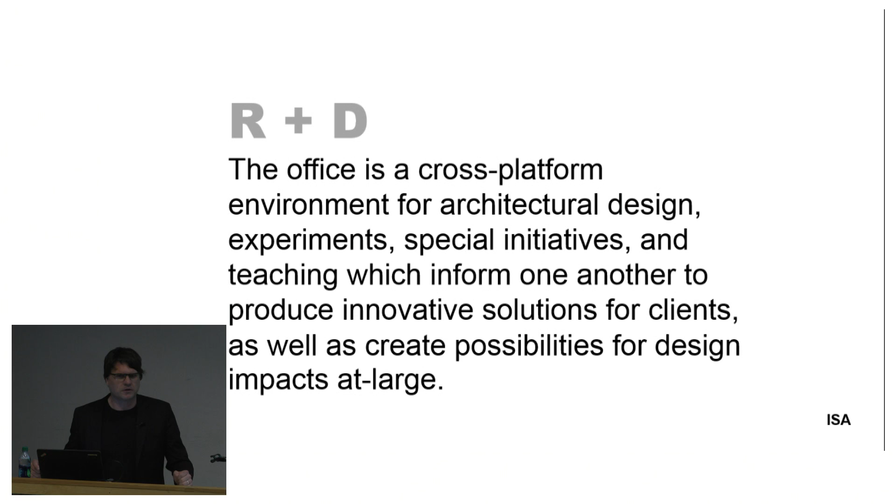We're also really interested in systems and infrastructures and prototypes. We're slightly less interested in very precious singular acts of architecture and more interested in typologies and designs that we think of as being repeated. We always like to talk about things that if you moved it to a different site - which to some architects is horrifying, you could never move that to a different site, it's for this site - we like the idea of thinking about how that idea would adjust itself to that site.

We also love sharing our logic with our clients and the people around us, and we're not really into the alchemy side of the mysterious design process, but like to share the process and allow stakeholders to become a part of it. And we actually find that it kind of radicalizes projects once people buy into the reasoning.

And then finally, this idea of urbanism, which I think is at the core of what we're doing. One of the reasons why I like Detroit in particular is that you come to Detroit and you have to recalibrate your definition of urban. There are a lot of areas of the city that may not look like a city, but are urban because they have history and infrastructure and the kinds of relationships. For us, this idea of brokering complex and contested relationships in different ways relative to different contexts is our way of thinking about - if you're doing that, you're probably operating in an urban situation.

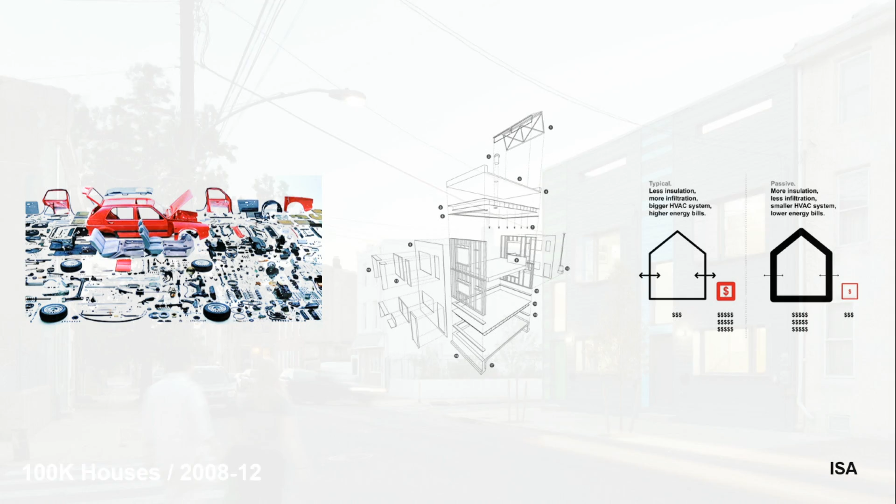So these lots were zoned for 3-story, 2,000 square foot houses. And he came out of the gate saying $100 a square foot, LEED Platinum, 1,000 square feet. We said that's a terrible idea, we're not going to be able to do anything for that. But it taught us so much about this idea of minimalism and simplicity.

And a kind of pragmatism about how to make a building. So we found ourselves thinking less about how do we make a cool building that we make cheaper, and more about how do we fundamentally rethink the way we conceive of a project. And so we really obsessed about every little move. The initial projects were 4 corners, very flat.

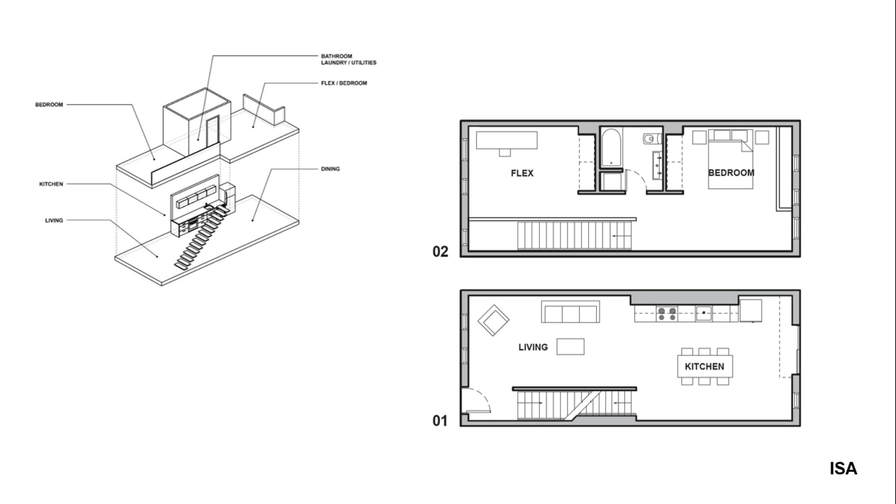So we called these urban cabins. This original house had 2 doors, the front door and the bathroom door. We were talking a little bit today about the challenges of mortgages and appraisals, and one of the funny things about these houses is we've done some subsequently where we actually had to put walls in for closing to show closed bedrooms, and then they would get ripped out—which is a whole other conversation, but I think it's an interesting subtext to innovation and the different layers of other things that affect buildings.

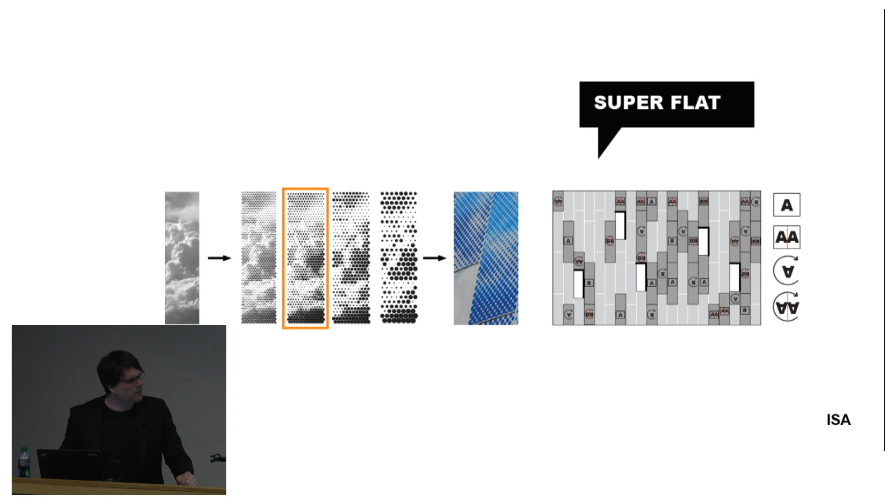We haven't quite moved on this, but this was an experiment we really want to get back to because we like this idea of housing as consumer products that are fun and are more like shopping for other things than houses, which tend to be a constraining transaction. I think this was a $5,000 add to the project. We used one screen, flipped them around—extremely simple in deployment.

The original houses were built out of SIPS panels, which are highly insulated. You can see the insulation sandwich there between OSB.

One of the interesting dynamics worth sharing is that a lot of our work is not built by custom contractors. One of the ways you build a house for $100 a square foot isn't your cleverness, it's that the contractor is willing to entertain the idea that his profit is at a different level. When SIPs panels came out, these guys were very confused by what they were doing, and that's a real hurdle.

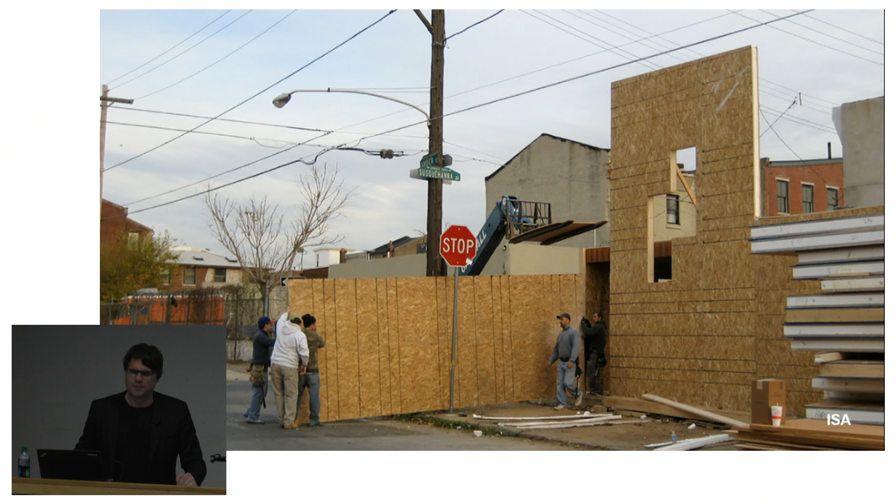One of the funny things about this project is that these 2-story SIPs rely very heavily on the plumbness of the top of the foundation. At this level of contractor, there's always a little bit of unevenness, so when the panels got stacked, they revealed some 2-inch separations at the top—and these are passive house level insulation panels. That was an interesting struggle to resolve, which got resolved in the field.

It's just this issue of cost, contractor, and technology aligning that's always a challenge. We actually wound up doing, and continue to do, double stud walls because they're really easy to deal with. You can bid them to any contractor in town—everybody knows how to build it—and the pricing has actually been quite good.

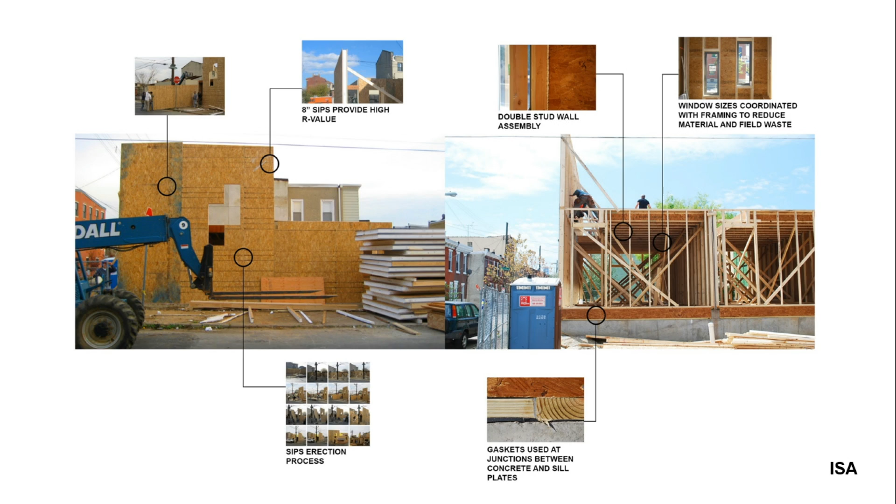There was also a philosophy with this builder. Prefab is a whole other conversation, but this developer was very interested in building local economies and jobs, so he loved the idea of having guys from Philadelphia out here building the houses rather than having them built off-site. This really came together in a nice way.

All of these buyers elected to roll $15,000 into their mortgages to put solar panels on the roof, and I think this goes back to the idea of what kinds of houses young people are buying, what their values are, and what they're willing to spend money on that maybe their parents weren't. So this was an interesting experiment.

I did mention prefab, and this is another kind of formative project for us—a recession project conceived on the back end of the bubble, and it was a prefab project.

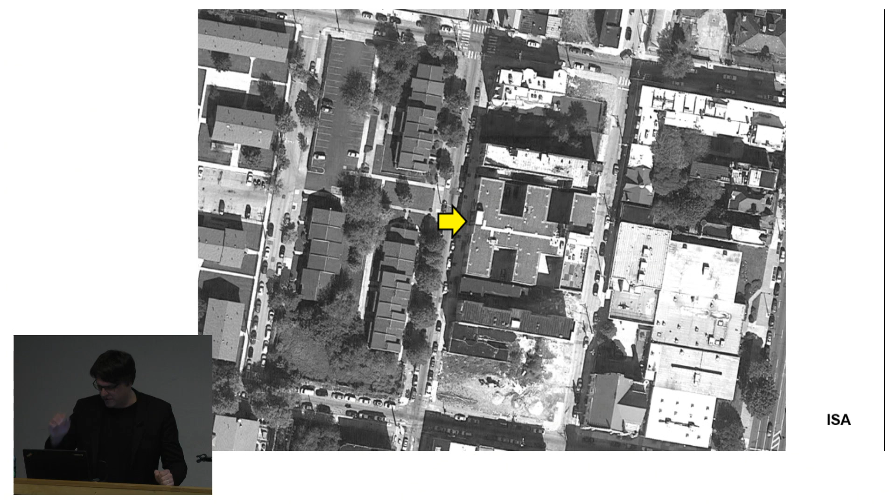You can see this is another infill site, a lot larger—I think this footprint was upwards of 20,000 square feet. This was a 4-story, 72-unit student apartment building near Temple, conceived from the start as prefab modular. This developer was really interested in experimenting with that.

I want to say something about Philadelphia green roofs. Philadelphia has a really aggressive stormwater law that requires the first inch of rain to be managed on site. So what's happened is we get what we like to call ugly green roofs, which we kind of love—they're not there to be an amenity so much as to be a sponge. This was actually the largest sedum green roof in Philly when the project was finished.

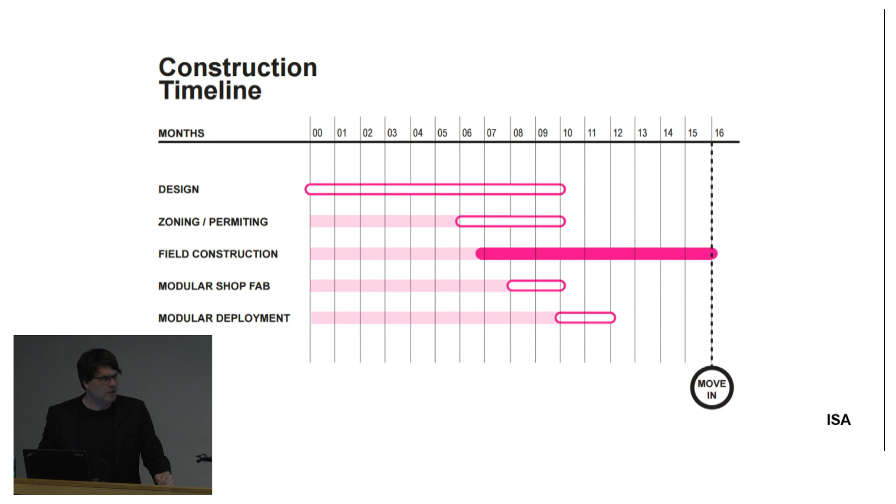One of the interesting things was that it happened very, very fast—the whole building was built in 9 months. What was really interesting, and you'll kind of see this, is that the site work was being done on top while the boxes were being built in a factory in the middle row.

And then they all came together on the bottom there. Those 72 units, everything was a modular box - the stairs, the lounges, I think it was 90 boxes, and they would set about 8 or 10 a day. So if you do the math, the building appeared out of nothing in about 2 weeks, which is kind of an extraordinary thing. But then what's interesting is all the seams - the boxes come out with finishes, kitchens and bathrooms in them, and then everywhere the boxes come together you have to go in and finish. So it's a very different idea about building.

There's a lot of room for innovation there because we're used to building buildings in layers where all the plumbing, all the drywall, all the tile goes in. This was more these sort of chunks that are complete with these seams that kind of need to be infilled.

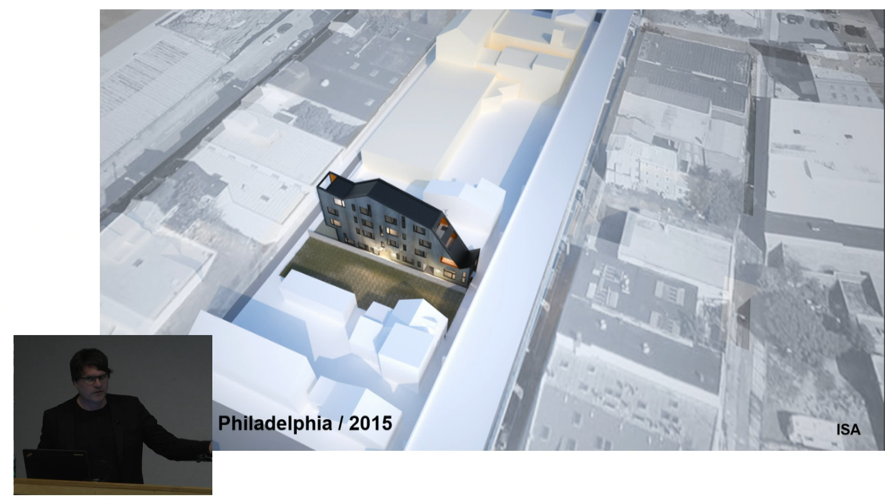So this is a more recent project which I thought would be fun to share. This is a very quirky, weird site - it's 15 feet wide and 100 feet long, and that's an elevated train line. We find ourselves loving these kinds of sites. Our idea for this was - this is in a zoning class that had some funny requirements. It allowed you to go up to 55 feet, had this funny requirement for a cornice line at 25 feet.

So we became very interested in these bands of buildings that kind of accumulated over time. You can kind of see us drawing these little profile lines at the bottom. We saw the profile of the building as an expression of the kind of constraints of the site, and we used that line to develop the membrane.

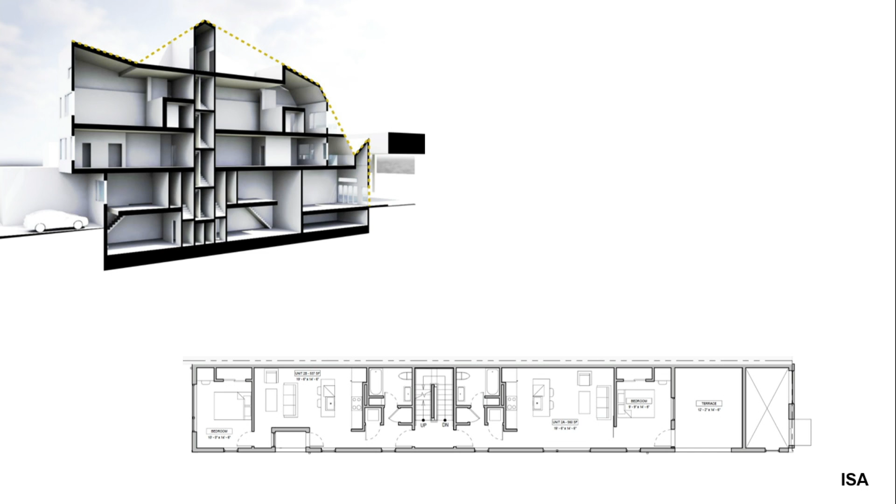What was interesting is those sloped pieces were able to create some terraces. One of the things we had to convince our client of - who of course bought a cheap piece of land next to a train line - his whole thing was, how do we make it feel like you're not living next to a train? And we were like, well, maybe you should just go with it. So we have these terraces that are actually right on the train, and while you hear the train go by, it's kind of an exhilarating experience.

I think we take great pride in turning - it goes back to getting developers to collaborate on building the city well, and I think it's a very exciting pursuit for us. So I think this project kind of comes out of the 100K house DNA. We're starting to look at whole blocks now.

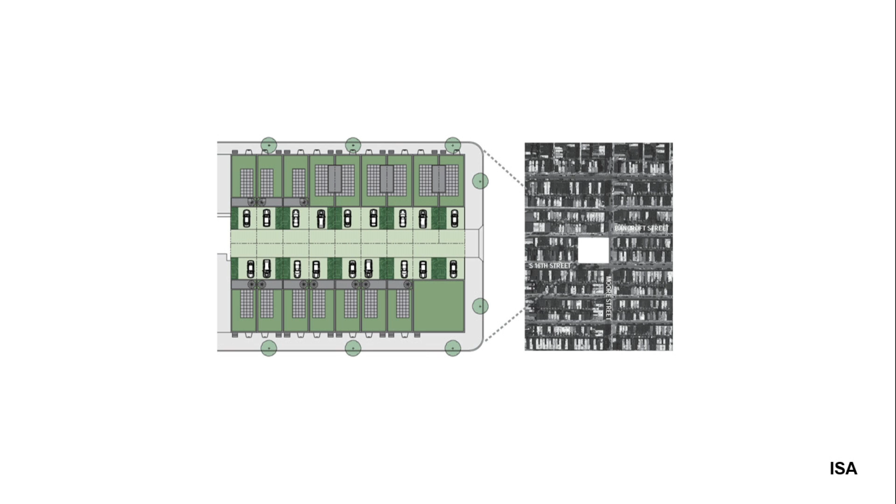Kind of get a sense there of the massing and scale. And there you can see the different building types happening, the row house models on the top and bottom of those plans, and then the condo flats there in the middle.

Roof yards and access are a big deal in Philly, particularly if you're providing off-street parking, since the sites are small. So these roof experiences become significant.

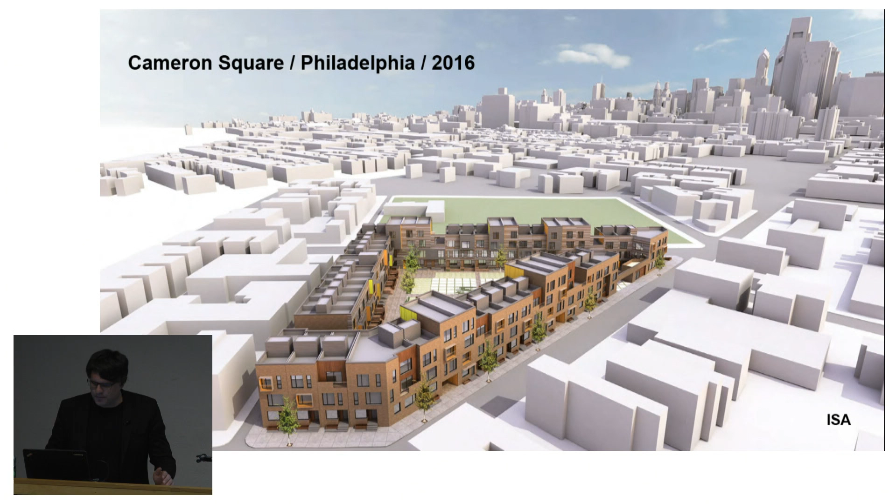Dedicated to this being prefab modular, which is kind of interesting. And I think the thing worth talking about here is this interesting courtyard condition that we're sort of presented with.

The client, frankly, came to us with the idea that they thought this should be a courtyard. And of course we went back to them and said, well, let us study it. We spent some time, and we came back and said yes, we think it should be a courtyard too, after we couldn't get some other things to make sense.

But what was interesting about this courtyard is, if you look at the different street sections there, the different sides of the courtyard have very different streets and different kinds of building typologies across the street.

So we had this idea that the courtyard was kind of responsive, and even though it's sort of large—I think this is 70 units where it stands now—we kind of like the idea of the courtyard presenting a different personality to these different frontages.

I think the big victory here for us was this: the starting point, of course, was the left, which is the courtyard needs to be cordoned off, and it's going to be parking, and it's going to be private, and there's a park across the street. I think in our mind this project is big enough that—Philadelphia being a city of very delicate urban components with lots of pedestrian amenities and very walkable—

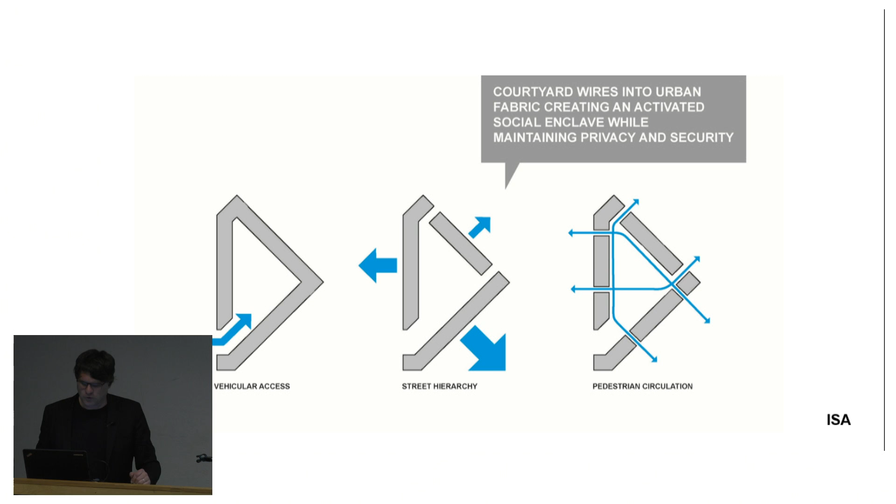We were able to convince them that not only should this become three different buildings with gaps, but we should actually start to perforate the first floor so that people can use this as a sort of cut-through.

So what we began to think about was the idea that we would arrange these boxes as sort of a modular system, and all the buildings are obeying the 16-foot wide grid, so we can push and pull pieces and go from single family to multifamily pretty easily.

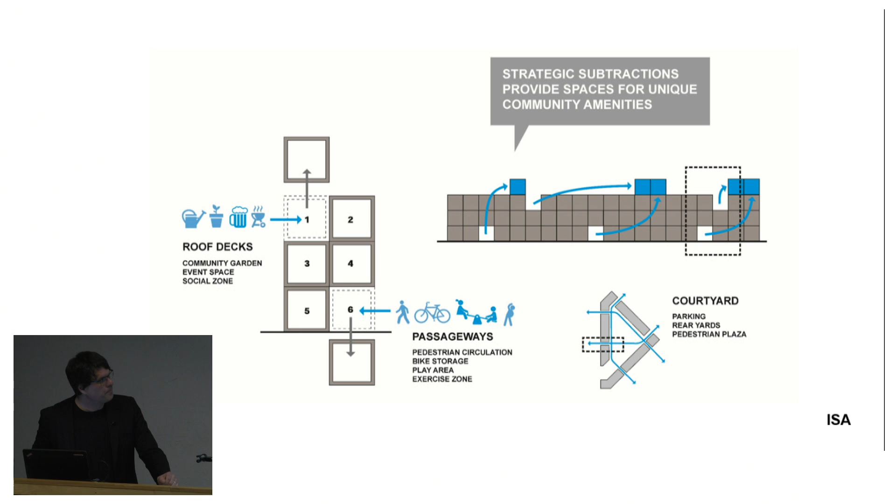The idea would be that you can get some higher pieces on, so we're going to omit some boxes, but ultimately we're going to get the same number of total boxes because we're going to put them on top. We didn't quite do that, but we're somewhere in between.

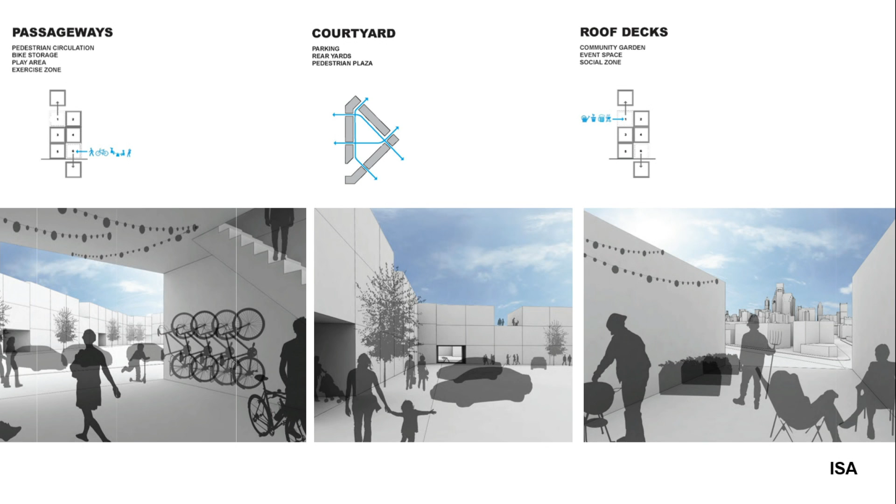And then you're seeing this idea of the roof deck, created when we put boxes on top and create these gaps. So the idea is there's a lot of private space in the project, but also a lot of shared space, and just this sort of idea of block making.

So this is the sort of courtyard that we're conceiving of. And one of the really interesting things about it too is this whole process of, there's certain amenities in Philadelphia that, yards, small yards are something that people hold dear.

One of the things we had an interesting conversation about with our client is the fact that the site's not going to support yards the way some sites will. So rather than forcing that on a site that doesn't need it, let's conceive of a more social backyard space where it's really more of a terrace. And when people are barbecuing, they can decide to eat together. They're going to see their kids. It's almost like a promenade where you're going to see your neighbors in kind of a classic way.

And they really sort of embraced that, this idea that you kind of make the most of the site presented, and we're excited about that potential.

So here you can kind of see this sort of geometry of the modular, which is 16-foot divisions, which become both single families and multifamilies. And then at these what we call knuckles, you see one at the bottom, you see a couple near the bottom, you see one at the top. Those are actually larger single family homes, some of which could be $700,000, $800,000, $900,000.

But what's interesting is in this project of 66 units, you're going to have 3 large expensive houses, 40 or 30 more modest houses, and then a bunch of 600 square foot flats, which might be $199,000, which in Philadelphia is kind of untouchable. So the idea here is actually to make a community showing the total bandwidth of the current market. And we're excited about that, it's kind of an unusual thing to find in a single project.

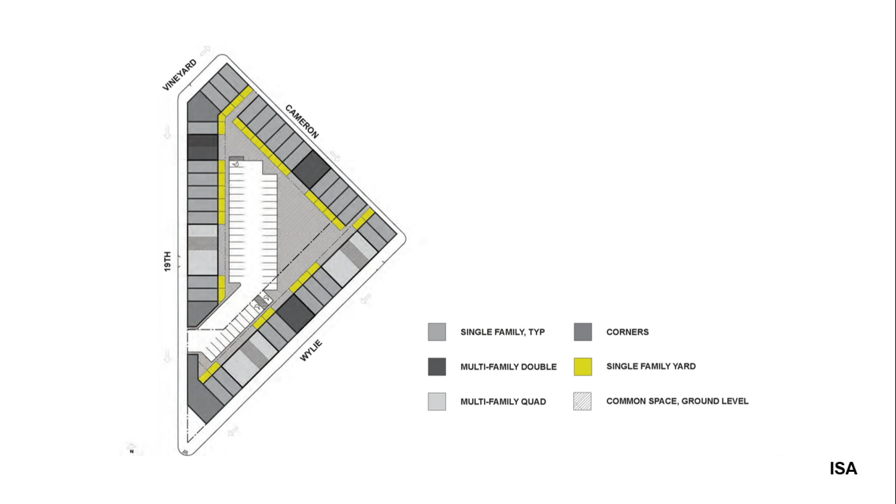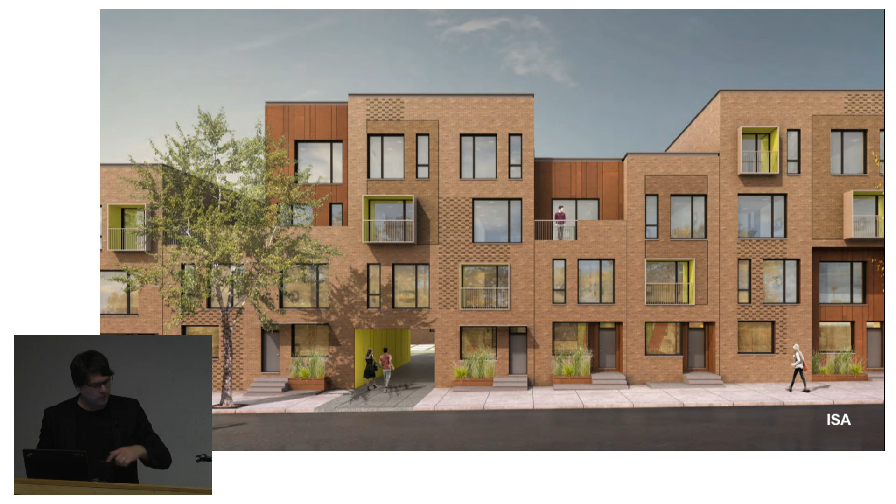This is a corner, so the park is across the street, and I don't know if you can quite appreciate the narrowness of the street to the right, but that cartway might be 9 feet wide. So they're really, and you can kind of see how that frontage doesn't have as many projections, and the first floor is set back. So we had a lot of debate about how continuous the courtyard should be and how much diversity, and this is kind of where we've landed with this sort of wall building that wraps the whole block.

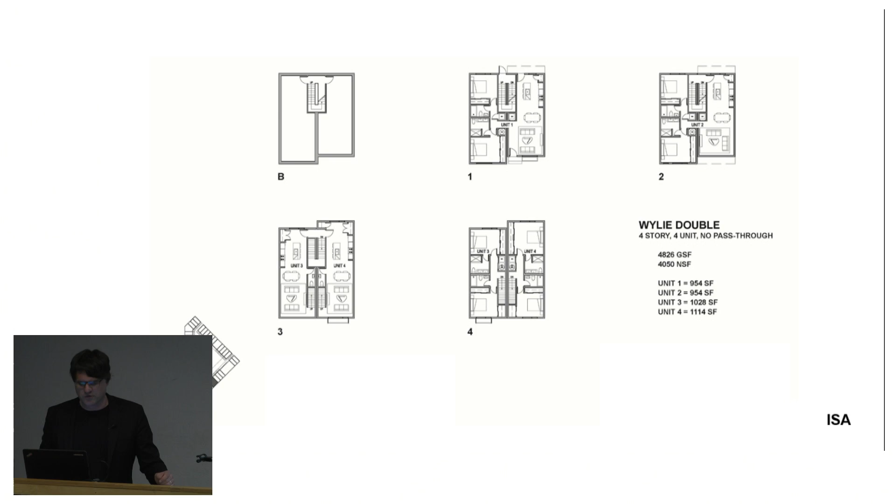The multifamily buildings use the same, so we kind of fit these buildings into the same sort of dimensional component, the 16 feet, where we're getting apartment flats that kind of fit into the space of those single family homes. And what's interesting is the client, as they refine their pro forma, can kind of mix and match the number of apartments versus the number of single families.

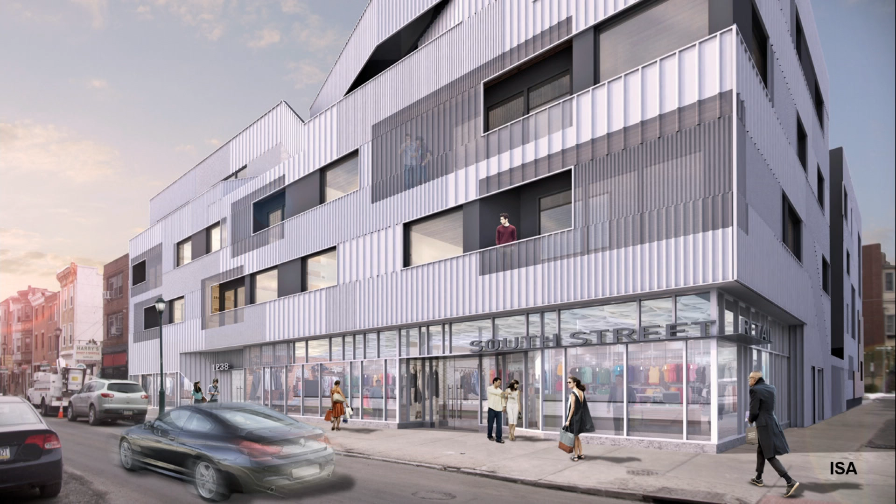This is the building as kind of conceived. I'm hoping the proportion of that is right—just realizing it might not be, looks a little compressed from here. But this kind of language of metal cladding and the transparency of the balconies is interesting. It's got a bit of a Bourbon Street feel, where it's cool to come out, but you want to be a little protected because you're not quite sure what might be going on there.

This is a little like the last project I showed—we've been really intrigued by projects that get big enough where you're addressing different neighborhoods on different sides of a block. In Philadelphia, on South Street you've got the terraces and the nightlife promenade, and literally on the backside of the block you have a 15-foot wide neighborhood street. So it's about thinking how blocks can get completed in that way.

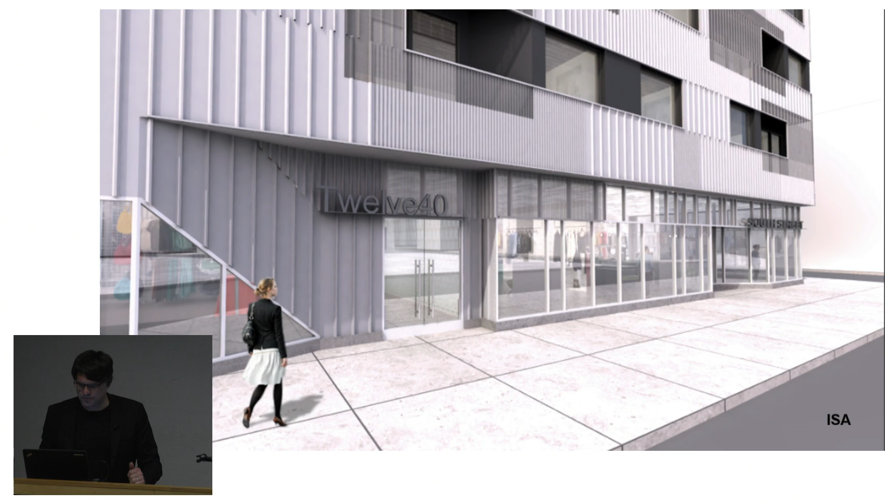There are some particularly nice units on top that have access ways to the roof where you're actually outside. This is the ground level experience at retail—this is a retail corridor. And the roof experience is up that exterior stair, looks like this. It's interesting that the top two units in this building are actually quite expensive and maybe have people living in them that you wouldn't expect, and then there's other kinds of people living in the building. I think that's related to that last project, these projects that seem to have some diversity in that.

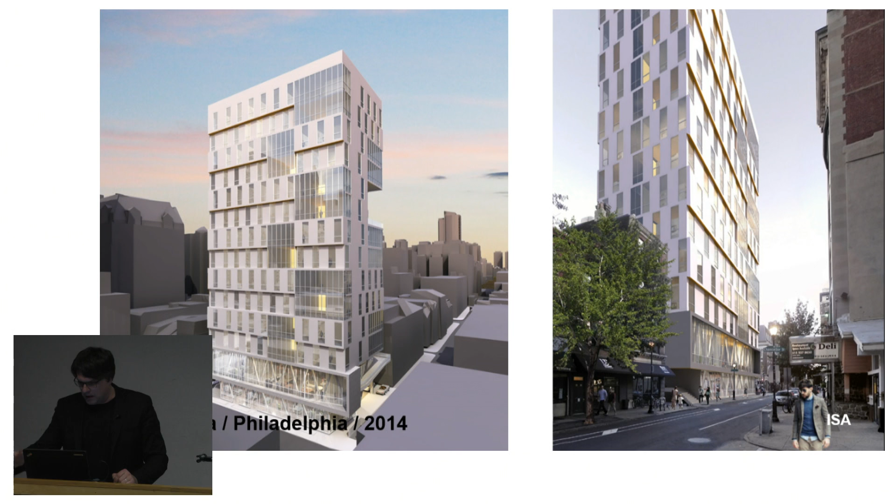The thing I want to talk about here, which I think is very programmatic, is this idea that this was a project we looked at from the micro-housing standpoint—a term I'm sure you've heard, coming out of markets like New York, Boston, and San Francisco, where things are so expensive that scale becomes a way to get access to certain areas of the city. Philadelphia is not that town—you can generally go around the corner and find something affordable. So what was interesting for us was thinking about micro-housing as a Philadelphia-specific idea.

For us, it actually became much more about a lifestyle and this idea of shared and flexible living. We were very interested in this post-college, pre-family period of life, which I'd characterize in places like Philadelphia as this incredible number of people between 25 and 35 who are working, being entrepreneurial, opening companies, and looking for a different kind of housing situation. We think that's quite an interesting possibility for buildings like this.

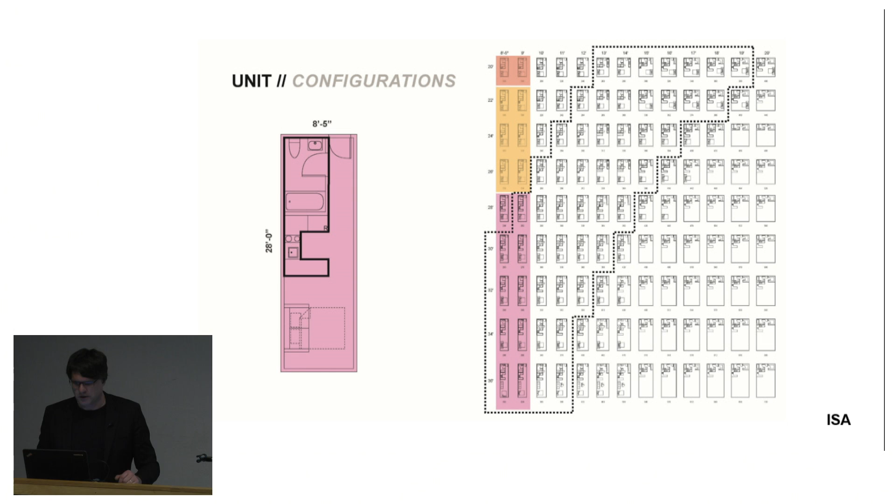Just a couple things to point out as I talk—we love these kinds of catalogs of things, and we call this the periodic table of micro units. The x-axis is width and the y-axis is length. This goes back to client transparency—it's a meeting we have with our client where we basically show that as you begin to enlarge and tweak the scale of these units, these are the different things that happen, to talk through what's possible. That dotted line area is the sweet spot of the size of unit they thought they wanted. So then we go from that to being able to look at how that works.

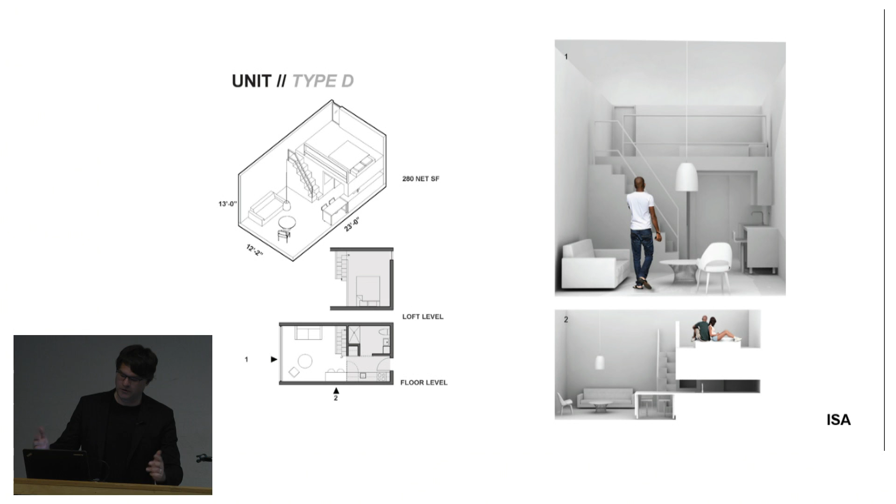What's interesting about this site is we had far more allowable height than we had FAR, which meant we had additional vertical possibility. That led to this idea of the mezzanine, which is less than a third of the total area of the unit and isn't counted as a floor. So that led to this verticality in the units, and we experimented a bit with how those might work.

We were really interested in the defining characteristic of this building, which was this idea of shared spaces—the laundry bar, the co-working space, the commercial kitchen, which is where you'd host your dinner party instead of in your unit. The lifestyle of the building is that you're paying for a bed and a small private space, but there are all these shared components that allow people to achieve this sort of lifestyle you see playing out in the urban fabric of a lot of big cities right now. And a little nod to the Philadelphia neighborhood fabric is this idea of the hallway stoop, where you get a little hallway-side niche to hang out, and these hallways become a bit more like streets.

And that's the context of that project. One of the thoughts too was retail on the first floor, and then the second floor is this kind of maker space, co-working space that really is also a kind of condenser for both the neighborhood and the city, but also the people living there.

I wanted to share this because this is on the boards now, and we're super excited about it, and it really represents the kinds of challenges. This goes back to the project next to the rail line, and projects on design.

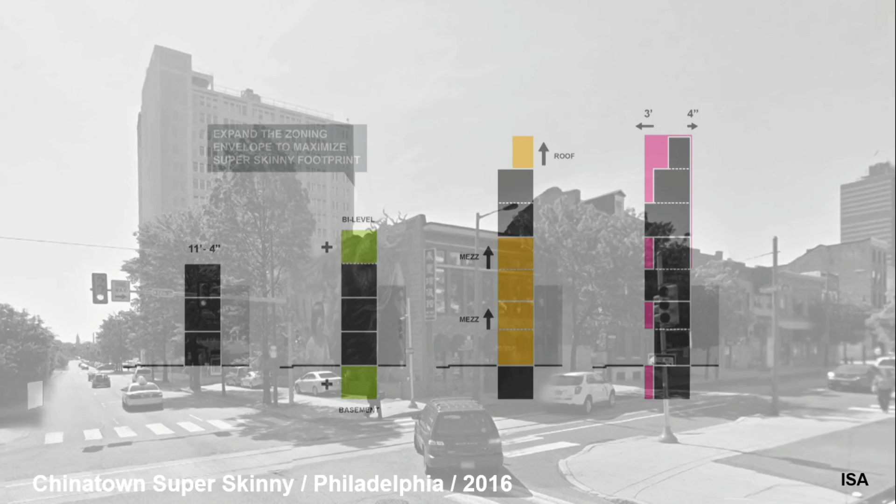Really the thought here was, how do you maximize the scale of a 12-foot wide site? This is a section investigation, and the idea was, well, we should use the basement, we should create bi-levels, we should do the mezzanine trick we were talking about before to get more verticality without adding a floor. And then there was this idea that in Philadelphia, you're able to project off a facade 3 feet. So we put all these things together and developed this little wafer building.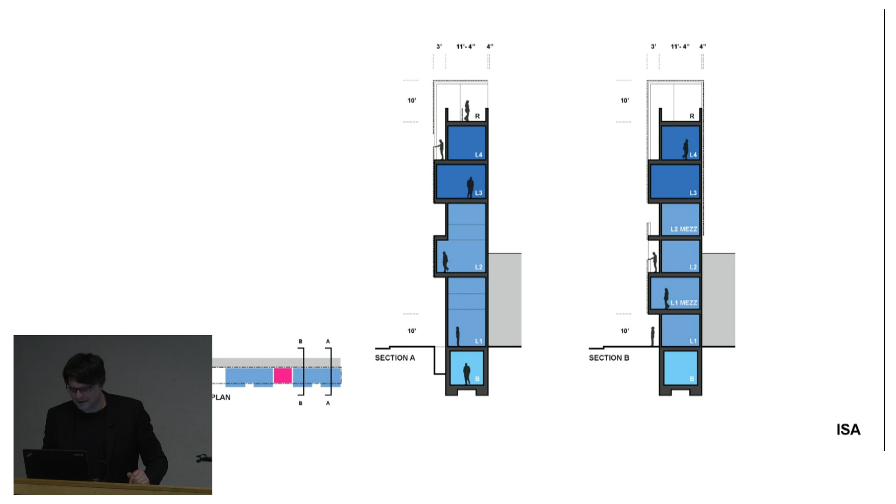Units actually aren't that crazy. We'll look at them. This kind of gives you a sense of the scale. It's actually like a skyscraper. It has the proportion of a very tall building, even though it's not that tall. We don't think this will all be wood frame, sadly.

Here you get a sense of what this just kind of goes through the section of the building, and you can kind of see ways that we're looking to grab extra space and maybe occupy the site in some unexpected ways, one of which is to make the basement feel like a reasonable place to live, and I think we're getting there.

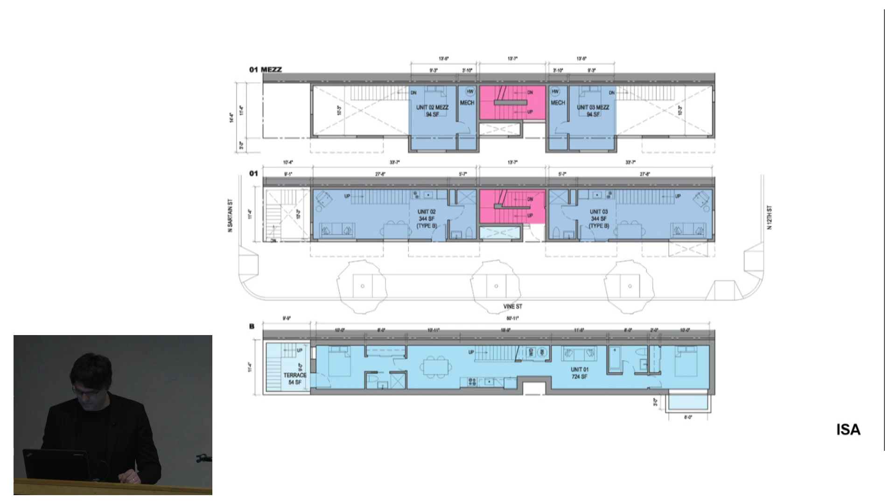So here you get a sense of what the units are like. There's a single stair in the center of the building, the basement level's at the bottom, which actually has turned out to be a pretty reasonable one. But the typical units upstairs have that first floor kitchen, live, office with a bathroom, and then a sort of mezzanine that you sleep on. I think these are, you can see here, 344 square feet.

And it's a fun site. We haven't really designed it, but this is the proportion of the building. We're also pretty excited about the fact that from the sunken highway, it's going to really be quite a prominent experience. So this falls into the category of kind of weird leftover sites that we really enjoy working on.

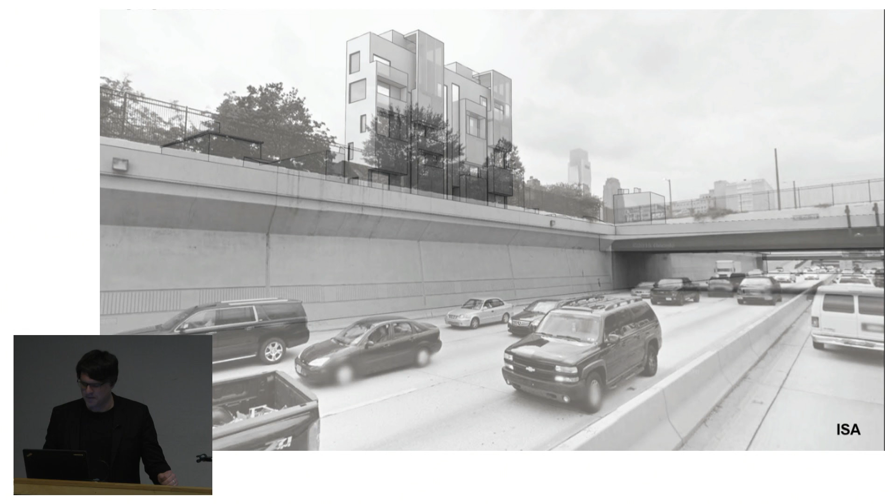I think our move about this, and it goes back to that other project, is if you're able to prove maximum value, you can generally get this conversation to go forward and get good real estate developers to embrace the idea.

That was the longest category, by the way. So you guys are like, oh my God, I remember that was by far the longest category.

What's my cut time? I have my clock and I can do whatever time.

What's that? All right. So again, I just want to start with a sort of formative project, and then we'll look at some more recent stuff.

So the Granary, which was a firestorm for us for a number of reasons, but we also learned so much from this project, and this is very interesting. It was actually the first example of slip-form concrete in the US, which is why it's on the historic register, and was really smack dab in the middle of Philadelphia industry.

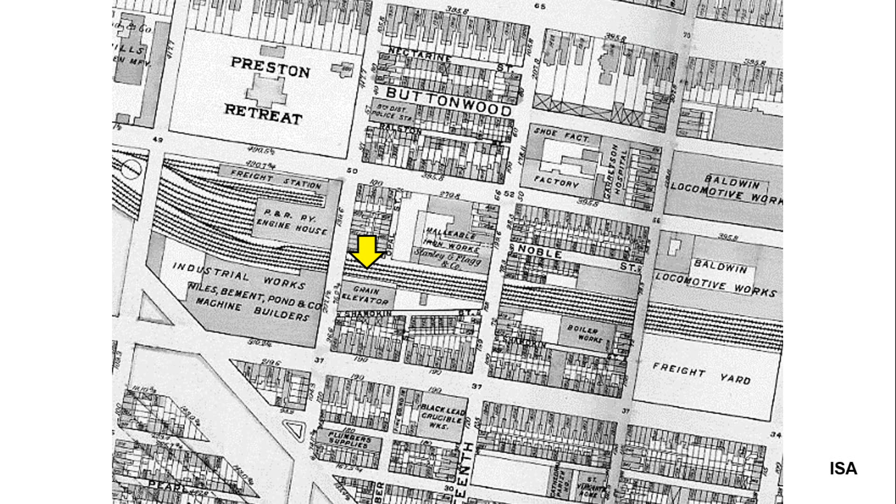And actually, the site where it says Industrial Works, there on the left, is where the Barnes Foundation is, that was recently built for that collection. So now this area of the city is completely transformed, but this building remains. It was built in the 1860s out of wood. If you didn't know, grain is highly explosive. It blew up.

Was rebuilt in the 1920s as this concrete building. And then when the grain transfer point and infrastructure changed, the building went basically into disuse. And in the 80s, there was a kind of eccentric designer who had his office on the bottom and a legendary party penthouse on top, which is often the kind of use these buildings fall victim to.

So we were very interested in how you put this building back to work, and the idea was to build housing on top, as you see on the future side. We measured the amount of housing we could put on top by thinking about what the grain probably weighed, and said okay, that's the foundation for the building. And the cool thing is that in urban areas, sometimes people like to get up high and have views, so our foundation was starting at floor 9, meaning the first floor of construction had great views.

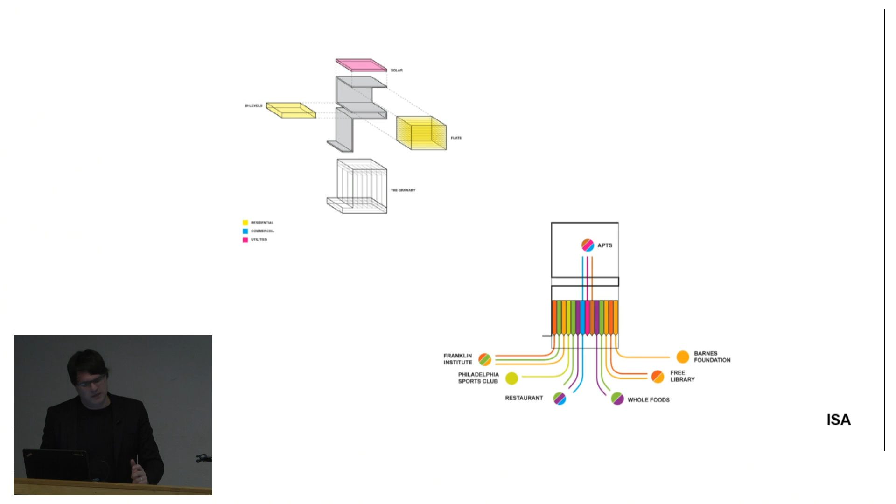What was interesting is these grain silos—there were 72 of these crazy vertical storage compartments—and the idea was to reuse those as galleries and for environmental purposes. We figured we could store stormwater coming off that building in one of those for the entire year; they were so vast. We talked to our MEP engineer about how the middle cells could almost be like earth ducts, because the temperature was so insulated from the outside, and there'd be great thermal transfer. And then the idea of galleries and other things, and a climbing wall there for the residents.

But this really for us was a really important project in thinking about history and understanding. I think this is very relevant to Detroit, in the sense that Philadelphia is a city with an embarrassment of old buildings that just don't have a life—there's no market to regenerate them. I think this idea of taking more aggressive, clever approaches to them is important.

This project ultimately died on the back of, quote, 'this building is as important as City Hall,' which we were baffled by from a historic perspective—our whole position was the building was built to do work and it should continue to do work. But I think what really set them off was the idea that the penthouses in that glass box were kind of living among the ornamental detail on top of the building, which you could no longer see from the outside. For us, the thinking was how do you really make this work, not in some boutique way or relying on a museum to move in and take care of the building in a non-economic way.

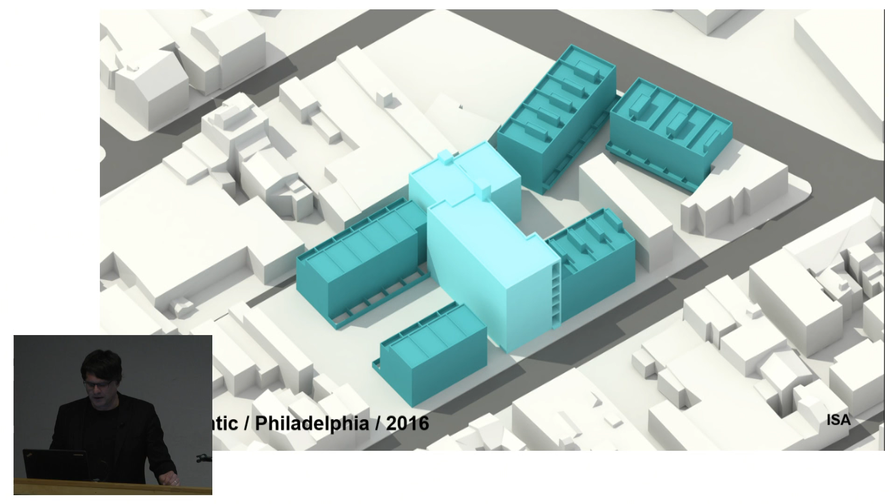So climbing wall and mushroom farming was really the final proposal. Didn't go forward, but—I'll say later in the reflect section, which isn't as far away as you think—we'll talk about how that spun off a research project, and seeing that relationship between speculation and architecture.

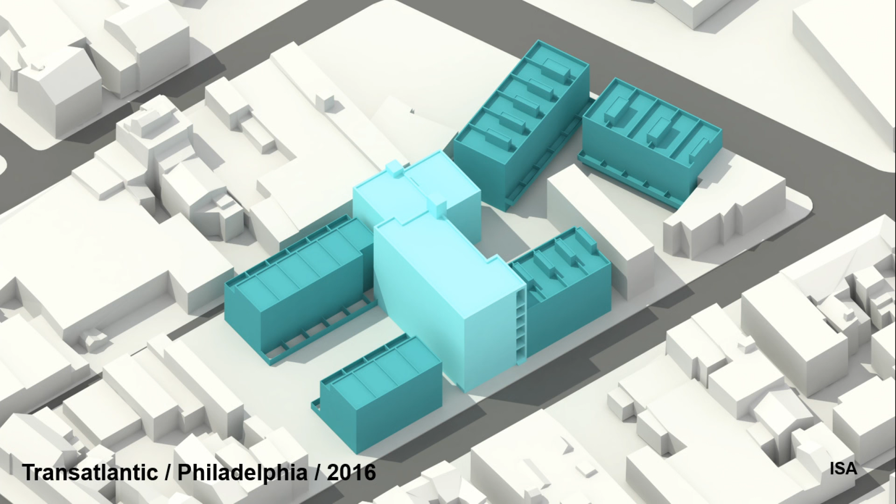So this is a reuse we're doing right now, and it's kind of interesting. There's a 6-story existing warehouse in the middle, and we're building houses around it. I'm realizing this falls into the category of a whole block that transforms itself as it hits different frontages. The building with the water tower is the one we're renovating, and the houses flanking it are the ones we're proposing.

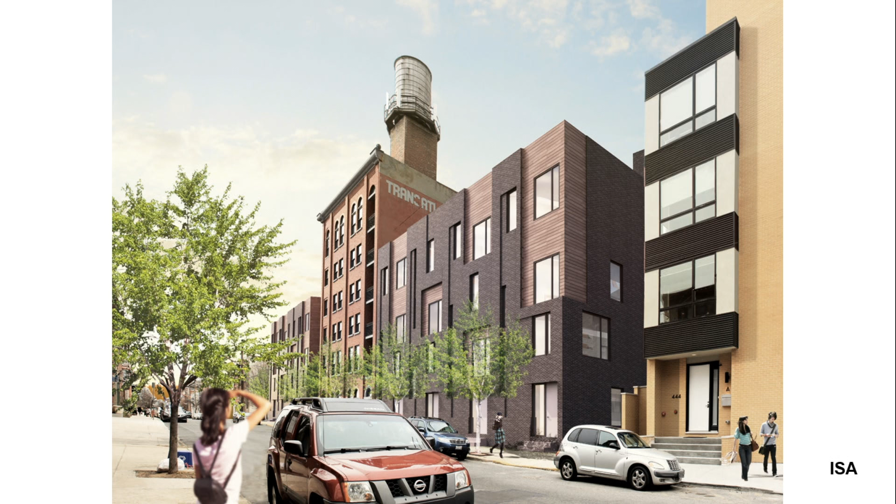One of the things we did was really enjoy this idea of the warehouse street wall—that's actually 25 townhouses. This is the narrow street that has a certain typology, and the wider street has a bigger one.

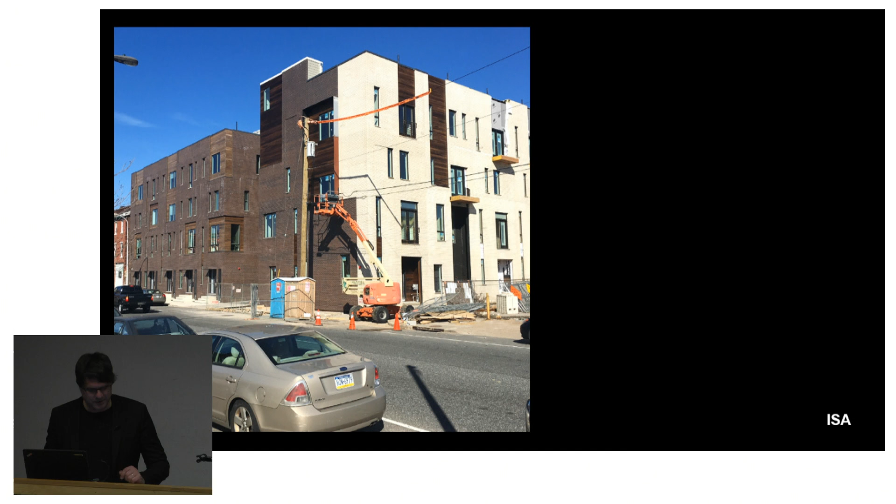Tons of under-construction photos, just because I wanted to share that with you—this is about where it is, a little further along than this. That's the narrower street that has these terraces that come out, and you can see the front doors are pushed back. This is the busiest street—the facade flattens out, and the first floor is buffered from the street with some program.

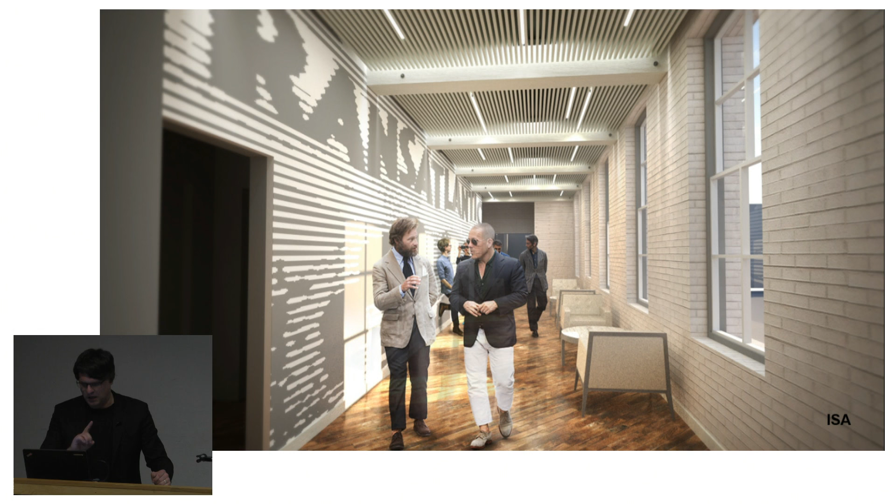So this idea of the block transforming—this is the existing building we're working on. It really has awesome bones, and we're just whitewashing the interior and putting in some kitchens and bathrooms. That combination of existing building and new construction completing the block, I think, is the story here.

It's funny, we were having this conversation about whether you return Detroit to its existing fabric. At some level it's like, hell no, it's going to require a lot of people. But in this particular situation, which is a highly gentrifying part of the city, returning the fabric, that back alley is a horror show right now.

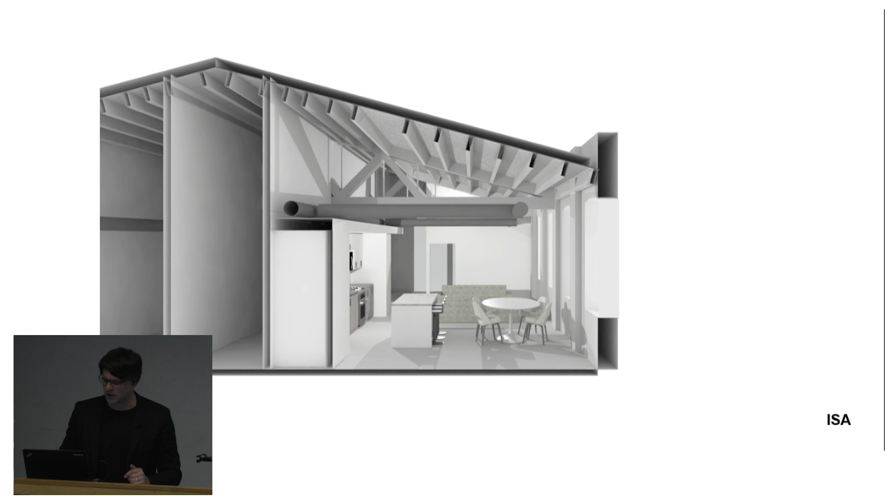Our argument to the neighborhood was that we want to front houses on that alley. It was obvious people wanted to put parking back there, but we really stood by the idea that we should just complete that alley because that's part of what makes the neighborhood awesome. So it's an exciting project for us as far as urban fabric goes.

This may be my most relevant Detroit project. This is a historically registered building in Philadelphia. It was like the first parking garage associated with a railroad company or something - in Philadelphia every building is the first something, and it's a bit frustrating sometimes.

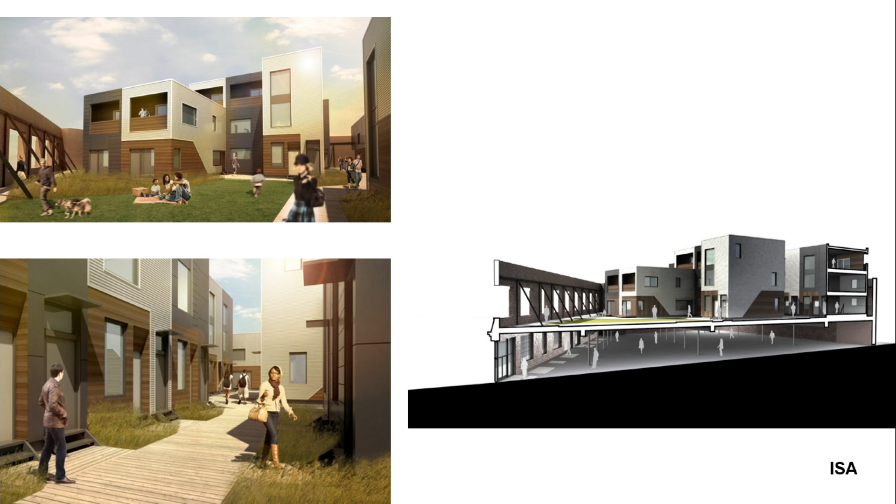The National Park Service battle on this was absolutely intense, because they're trying to get tax credits, and the idea was we had to retain the roof line and all kinds of things. So the building doesn't come above the outer wall, but this is getting built in a related form - the idea that you're basically taking that shell of a building and using it as a platform for something new.

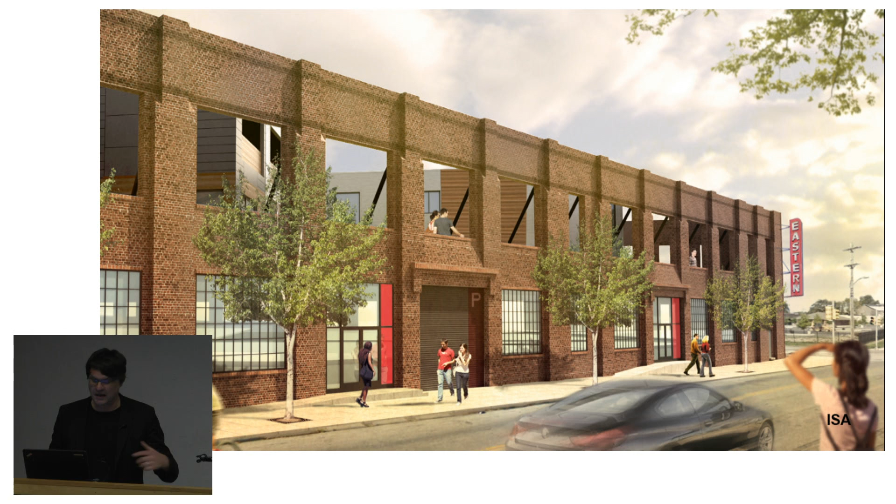I think this is very much like the Granary project, where here's a bit of history, and our solution to it is based on current economics, not aspirations to return to something that doesn't exist anymore. On that basis, we're extremely excited about this model, or this sort of system or prototype.

This is more of a campus kind of thing we're working on, an old chemical campus, an old BASF research campus outside of Philadelphia. The idea here is simply to return - this is a kind of incremental project where it's not about restoring every building to its former glory, but lightly enhancing some components of it.

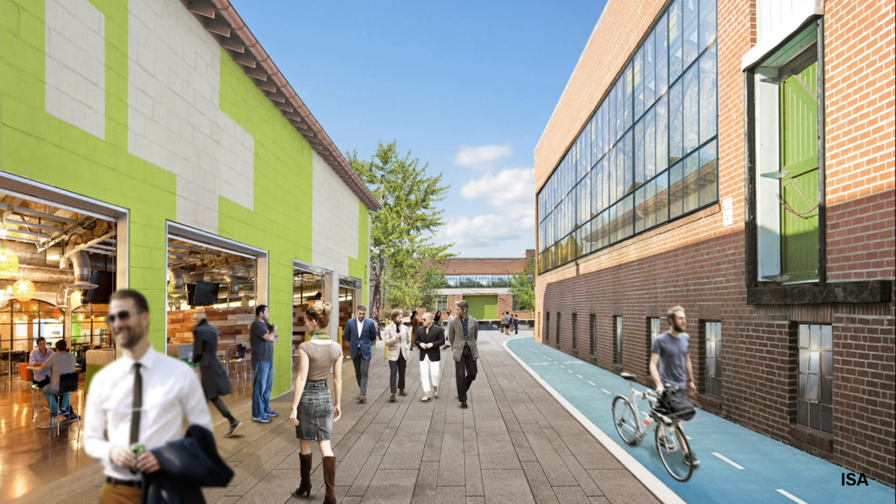You can see here with color and annotation and landscape in a very subtle way, this creating of an urban space where there might not be an urban space. This little alley is super important to us, and having that moment of creating vibrant creative workspace. There's a brewery we're working with on the left there that's going to be that kind of tenant.

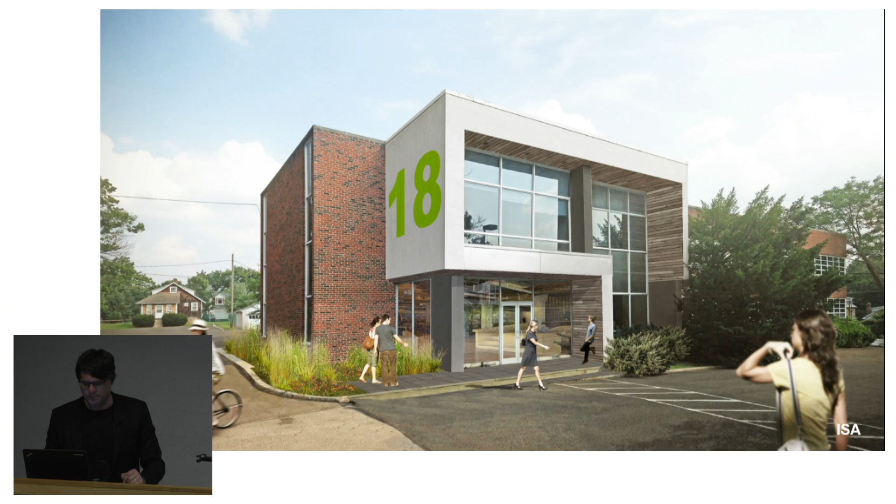And really on this kind of building, which doesn't need a whole lot of work - the idea here is not to spend tons of money renovating the whole building, but to let the existing building sit and just begin to modify some of the components to develop a kind of language around all these buildings.

So the lobby gets impacted, but the back office of these buildings kind of remains.

This is a related project for Rodale Press. It's the largest woman-owned publishing company in the United States, I think, a little bit north of where we are. It's kind of interesting - they're based in New York and here, and it's very expensive to do photo shoots and some of the work they do in New York City, so they wanted to create a kind of creative hub in this existing warehouse, which is pretty unremarkable at the moment.

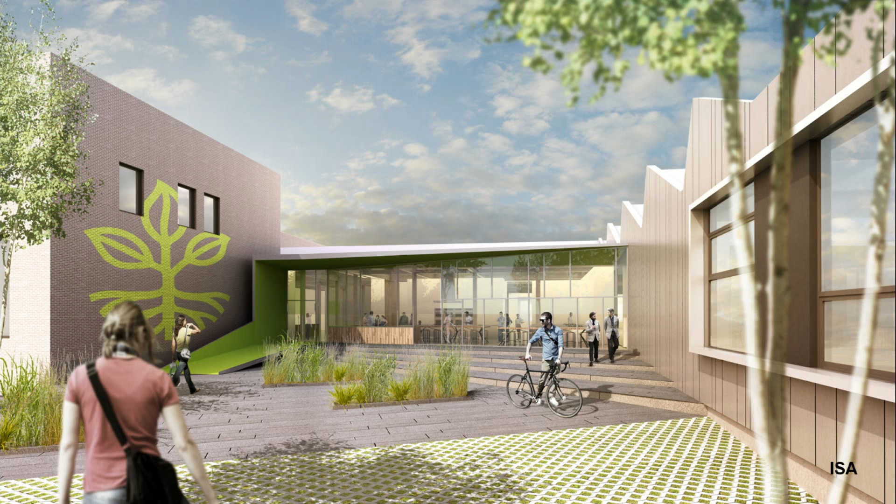But the idea is they're very interested in food and test kitchen stuff. So the proposal is to remove - you might be able to equate these images now - we're removing the funny entry chunk to create a courtyard, which opens up a new social space.

So there's photography, a little overnight accommodation, and a test kitchen that's going to create this incubator. Maria Rodale talks about Emmaus becoming Portland, and I think we're not holding our breath on that, but the idea that they see this relatively modest renovation project as something that can become a seed for the transformation of a neighborhood, we find really interesting. That's looking back out from the test kitchen to the plaza.

See, that was pretty quick, right?

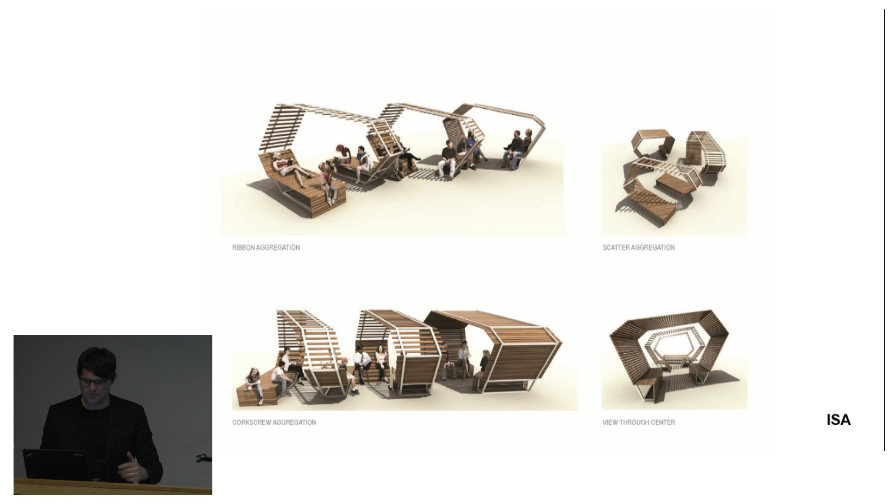The idea here was simply that if you develop a new kind of public seating, you want it to look like a seat, it can't be so different that people won't sit on it. But the idea was to create a kind of social comfort among people, a delicate balance between feeling like you have your own space, but also being proximate enough to other people in a comfortable way to want to engage.

It was built with local craftsmen and fabricators, and devised in a way that it can come apart easily and get moved. It all fits together in three pieces, geared toward the maximum weight a union guy can carry with a friend. All these rules, but we managed to solve that. Here it is going together.

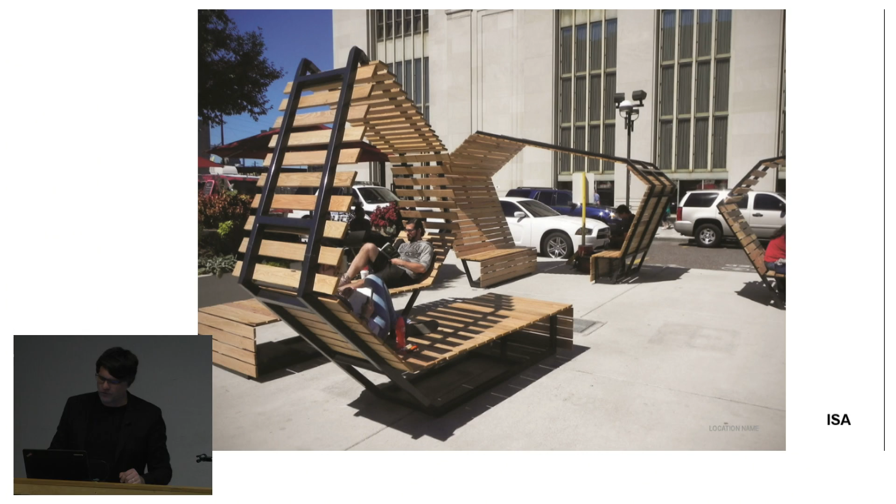This is the main train station in Philadelphia, and it was used in a certain way there, then this was it in a neighborhood park out in Philly, and this was not staged. This was just us showing up and people wondering why we were taking their picture. It was really heavily used, and I don't really capture all the crazy things that happened, but we had an Instagram feed and saw things on these benches that were unspeakable.

But it was really interesting, just as a kind of social infrastructure for the city. I think it may have worn out by now, I think it was in year three, with large dogs running over top of it, and Tai Chi happening in strange places on it. But I think we really got excited about the kinds of impacts you can have in small ways.

And then this is maybe a more formalized, similar idea, and we love these assignments where someone has a crazy notion and we test it.

Philadelphia is full of tactical urbanism and full of beer gardens, and it seems like when the weather is good, you can sell beer anywhere. So this guy was like, I want to take existing surface parking lots and build a platform and put beer gardens on them, because a lot of these surface parking lots in town are in these amazing canyons with buildings around them, and his idea was we can really monetize this space.

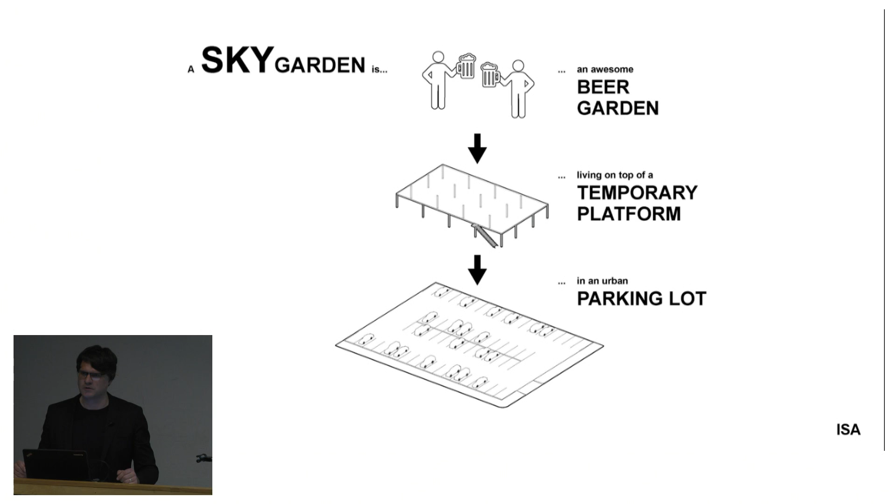So really the proposal was this kind of system where the platform is actually off-the-shelf technology from a company in Cleveland, I think. The bar and the restrooms are in containers, and it's a strategy for being able to deploy this on a seasonal basis. Again, it gets to this idea of prototypes and thinking about systems of occupation.

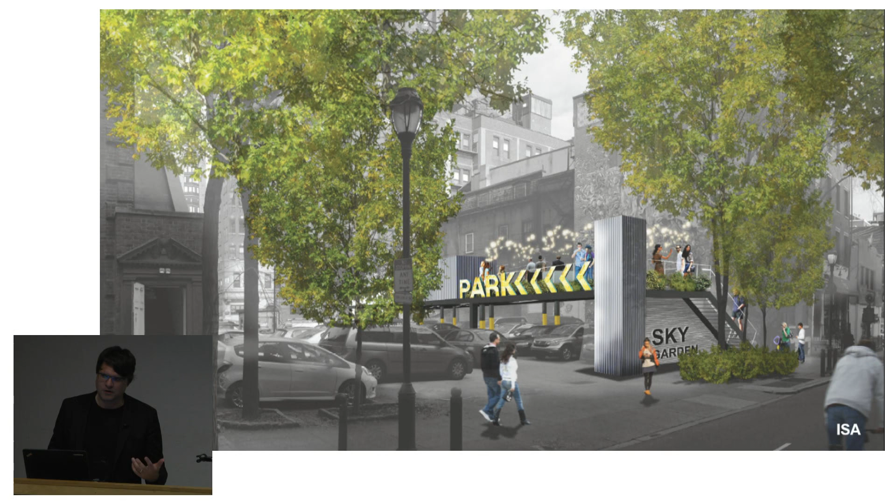What was kind of fun was speculating a little bit about this added value idea, that there's a beer garden on top of parking, and is there a benefit both ways? We're thinking, well, during the summer you get shaded parking, you can charge a little more for the parking. There might be the risk that you get some beer spilled on your car, we'll see how that might go. But this was our exploration of the beer drinking experience on top and the car parking experience on the bottom. I think we have a number of really interesting assignments coming up.

This renovation of an existing pier on the river is being conceived of as this kind of crazy maker space, market and beer garden. Another project we're looking at is doing a large-scale tactical installation that precedes a large private development, which is really fascinating, it's like a $1 billion 10-year build, and they're like, look, the first season we want to get people on the site and make a public space for the community, and maybe that lives on as the project gets built around it.

And one of the things we're thinking about there is actually playing around with the ongoing construction as a kind of visual for the community space.

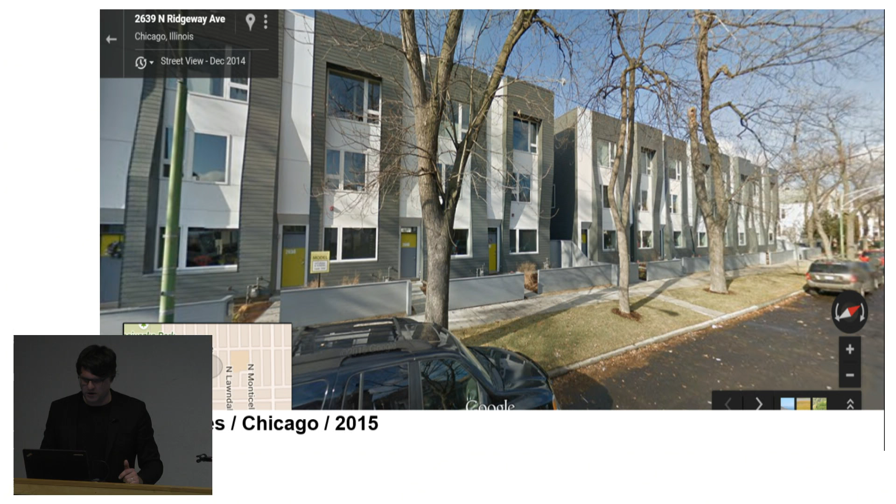We talk a lot about this permanent temporary work, which I think has a lot of application here as well. I'm going to show a Detroit idea, we'll get to that. Some other cities we're working in—my new partner's in Boston, we have some projects going on up there. A client from Chicago flew to Philly and said, I like these 100K houses, let's do some houses in Chicago. So we've been doing some work out there.

This is a 31-unit project, based on the fact that there aren't that many attached houses in Chicago, actually.

This was like a half a block project, a little bit like some version of what we did in Philly. Beyond it having a lot of 100K characteristics and being energy efficient, even though that didn't seem to be a priority for the client, we said, Bob, just do a blower door test, let's pay the $100 for it. The infiltration rate on these houses is lower than some of our LEED Gold houses in Philly, partly because Chicago contractors are a wee bit better, I think. Because in the end, it's all about the tightness of the envelope.

But really, this project was just about how do you get this thing built for $115 a square foot, right? That's HardiePlank—we worked with the contractor to make sure we could get that detail to work. We looked at some photos, and he did it.

You can kind of see some similarities here with the open plan from some of the Philly projects, but this definitely has a kind of Chicago sensibility about it.

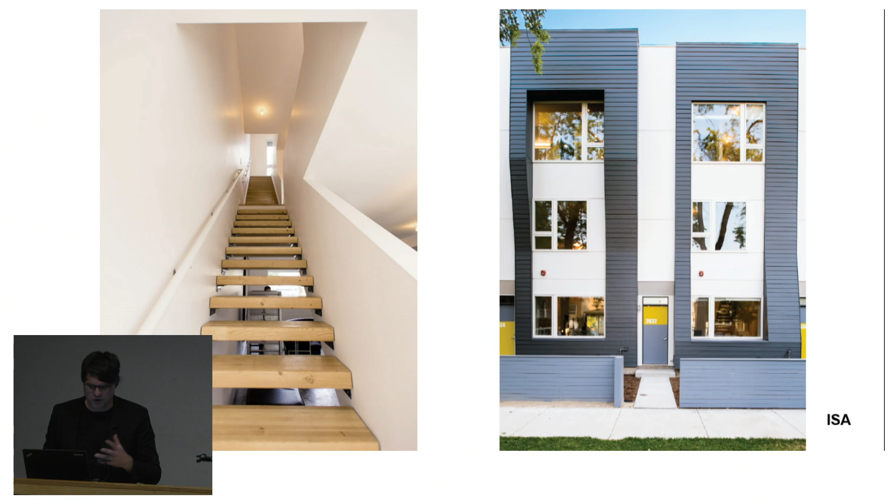Stairs are often places in these buildings where we're able to add a little bit of value. This is our riff on the Chicago 3-flat, and what's interesting is this kind of goes back to the Chinatown thing a little bit with finding the basement level.

I thought I had a diagram there somewhere, but basically the courtyard is excavated, so there are windows in the basement level where you walk out from the basement. You can see the units are designed with a living side and a bedroom side. There's a roof deck, terraces, and this sunken courtyard, and you can see the missing triangle site.

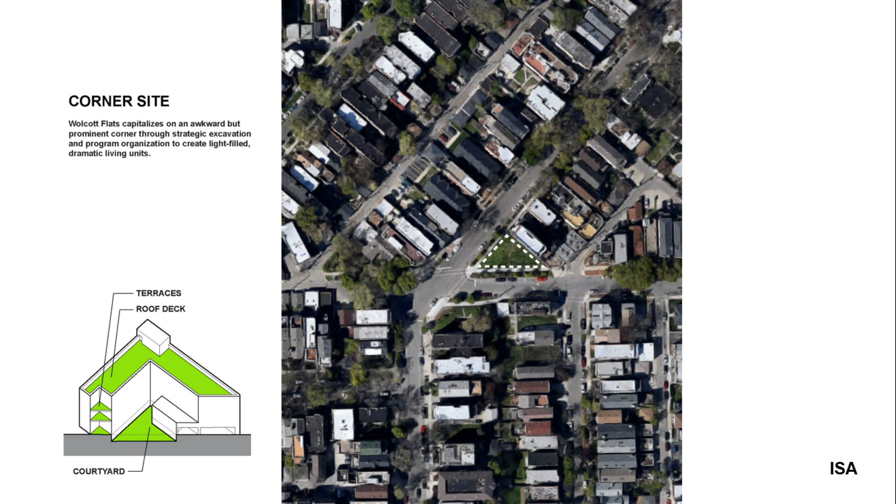And there you can get a sense of what that experience is like down in that courtyard, which actually makes that basement unit really, really terrific.

Interiors—a lot of the same sort of aspirations from our work that we're doing in Philadelphia.

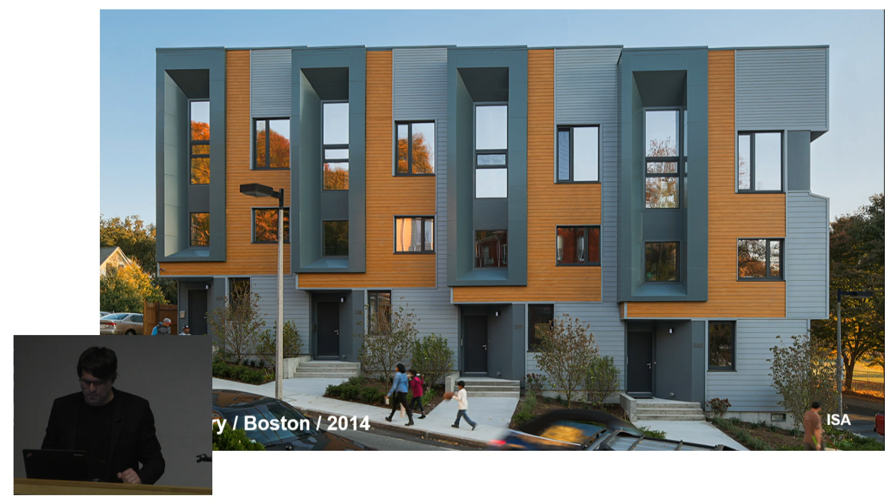So in Boston, this was a competition to do housing that produces more energy than it uses, a mayor's initiative. One of the things we learned in Philadelphia with energy efficient housing is that it's all about the envelope—by insulating a house well and air sealing it well, you can take 80% of the energy out of the house.

What's funny about this challenge is we've become very skeptical of net zero, because if everything was 80% better, we'll have done so much more than having a few net zero projects. But once you get into conversations about going net zero or net energy positive, you need solar panels. We literally had a conversation once with a client about whether to cut down trees on the site to get the solar exposure to meet the challenge. Anyway, what was interesting about the project is we took this envelope idea—this is a double stud wall project with lots of insulation.

I think we were approaching like R65 in these roof assemblies. Basically it was, how much PV do we need to get over the hump?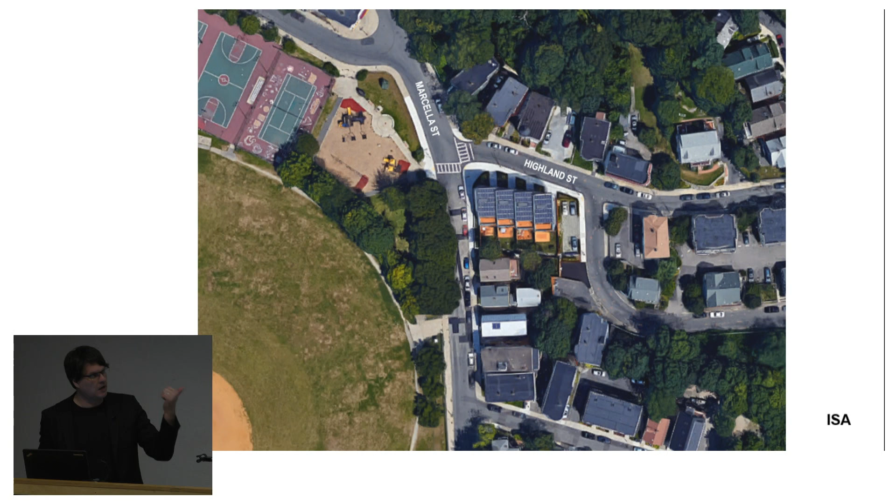You can kind of see the nature of the site here, and you can see the solar panels on the roof, which are pretty extensive. At one point we actually thought we'd be wrapping the whole back of the house with PV, and we're kind of happy we were able to keep it on the roof—that actually revealed the opportunity for terraces in the back, which you can see here.

You can get a sense that the geometry of the roof was calibrated to the solar angle, with a stack effect ventilation strategy. This is in a pretty challenging neighborhood in Boston, though we could never really see it.

There's a massive affordable housing shortage in Boston, so they're very interested in figuring out how to provide new housing types that both save energy and hit a certain price point. These are price points beyond what Philadelphians and Detroiters know as affordable, but it's a different market. Still, you can see a lot of the same strategies deployed here that we're deploying elsewhere.

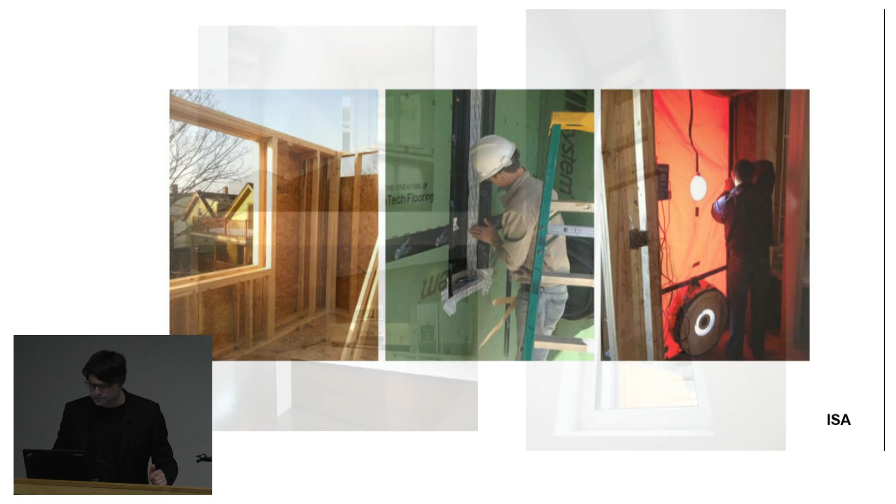As much as we want to believe design is such a big part of high performance buildings, this is where it really happens. Making sure these guys get it right matters—you can see the double stud wall with blown-in insulation, and what this guy is doing in the middle picture is incredibly important: buttoning up all the potential areas where air exchange could occur.

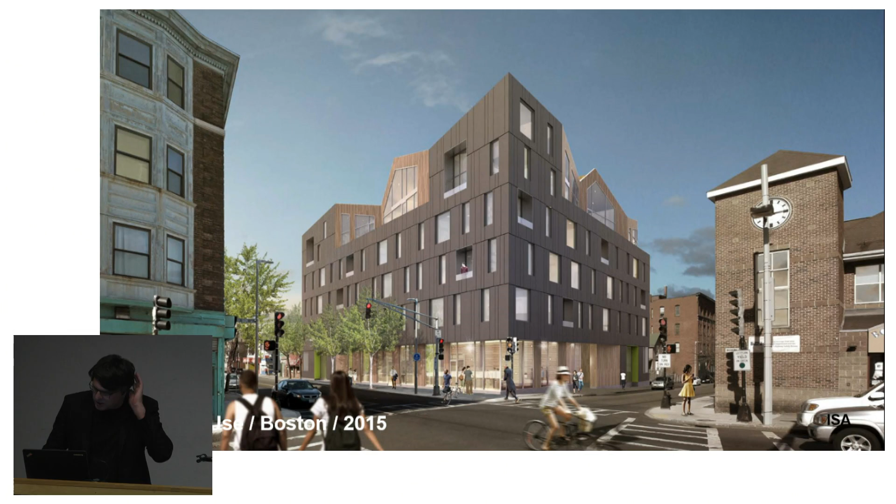This is our current project in Boston that's going through review. I want to talk about context again, because it's something we're really interested in—thinking about how to generate opportunities out of the existing fabric.

Our argument was that this neighborhood has big warehouses that look like commercial buildings, and little houses with pitched roofs. So our strategy was to create a hybrid of the two.

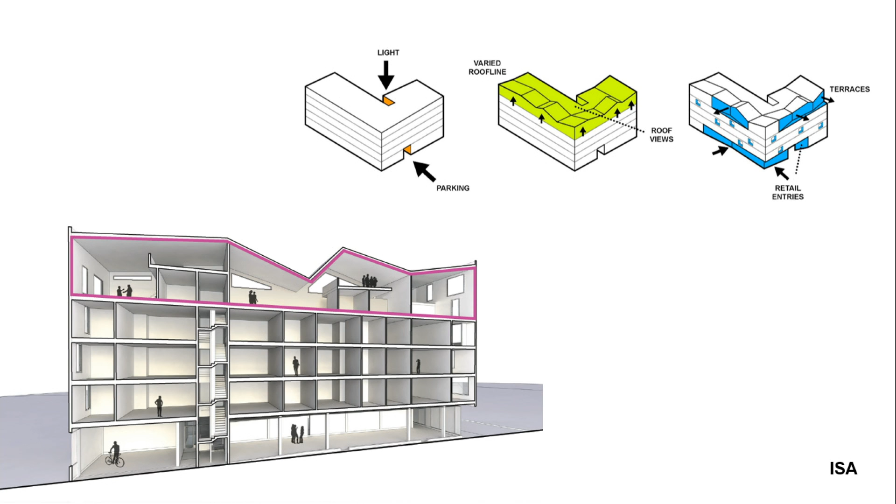What was interesting is that it goes back to this mezzanine level—at the top of the building, playing with this roof shape generates double height spaces, sleeping lofts, and incredible views. I think it's fascinating how context generates possibilities for something new that's still very much in keeping with what was there.

There's nothing more fulfilling than a neighborhood meeting where people actually pick up on what you're doing and feel like, 'I respect the fact that you're trying to pull that out of our city.' I think that goes back to this idea of sharing logics with stakeholders.

You can get a sense here of the retail base and the common roof deck, which actually happens behind that kind of crenellated roof form, which you can kind of see there.

This is the DIY house. We had a moment pitching a version of 100K to Detroit, and I'll share what our thought was. I remember coming to Detroit and meeting with Midtown, and this idea that a $100,000 house would be preposterous—it would have to be a $10,000 house. We were scratching our heads like, okay.

What was interesting is it got us thinking about how to adjust that thinking. At first we thought, you build a small house and add to it. But then the idea became: if we want a high performance envelope—which makes sense in a climate that gets cold—we should really explore where the certificate of occupancy happens and try to ratchet back the investment in the house as far as possible.

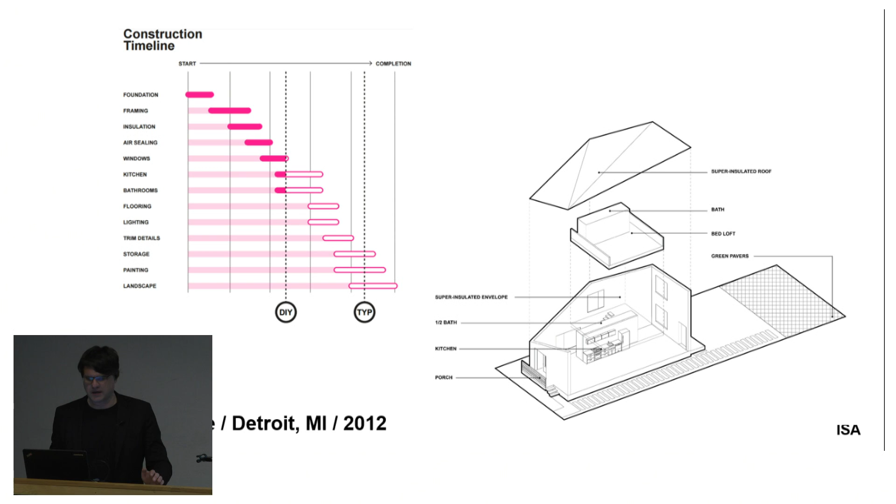The building code, I don't think would quite allow this—we're being a little speculative—but the idea is to capitalize on the emerging maker culture of young people in Detroit. You don't want people messing with the envelope, but you can certainly have them building out the insides of their house incrementally and living in them in different ways over time.

So that was really the theory of the project: you build out the envelope, but let the inside happen through time—interior partitions, painting, lighting, storage, flooring potentially—allowing that to become a kind of ongoing activity.

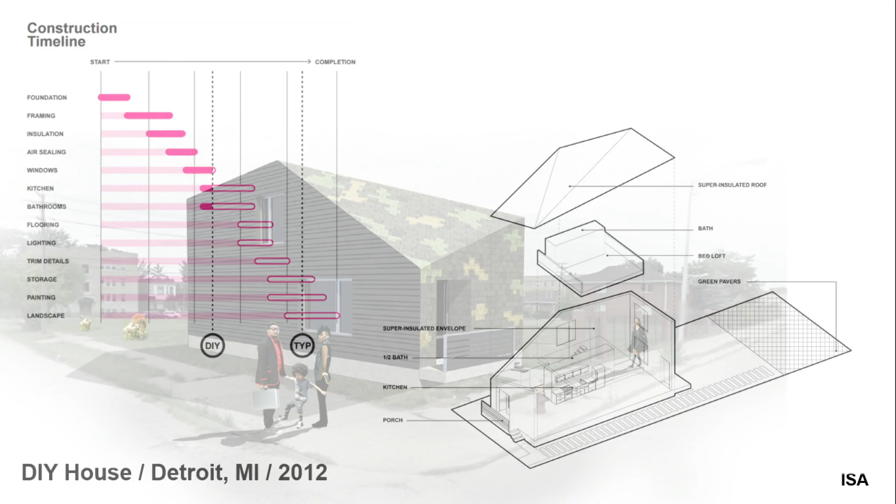Everybody's house has—I mean, people work on their houses constantly after they purchase them. So the idea was, can we ratchet that back?

We also thought a lot about the incremental urbanism of that idea. This was 3 or 4 years ago, and there was this whole discussion about why would you build new things when there's no market for it. I think the idea became, well, maybe it's this combination of aspirational and retrofit, and that there's a place—new things say something about the vitality of a market. And frankly, I think you're starting to see it happening now, which is exciting.

I did add this because Scott and I had a conversation today about evidence-based design, which is a whole other topic. But I wanted to mention it because we've done a number of projects where we collaborated with a health scientist on outcomes-based design related to health. This was a project for supportive housing, a competition in Syracuse.

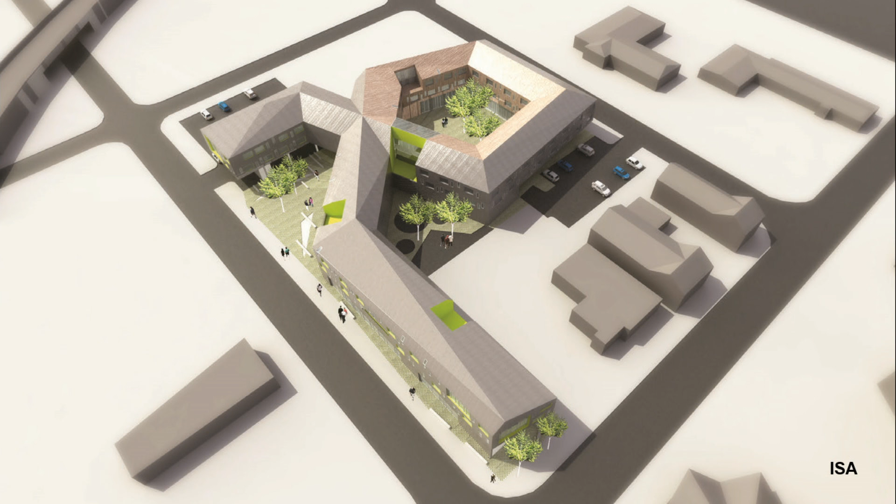I'm going to have to talk through this quickly. The idea was she creates this kind of brief, does a literature search—it's a way of starting a project. For this population, there is known credible literature supporting certain conditions and tendencies: exposure to light, the way people socialize. The project we developed came out of this. I don't want to present it as a one-to-one relationship, but more as a method or a way of thinking.

At the larger scale, one of the conclusions we had was that there were different kinds of social spaces—spaces where people are ensured they won't encounter people unlike them, versus conditions where they might be exposed to the public. That hatched the idea of the two courtyards, where the inner courtyard was for residents only, and the outer courtyard was the interface with the street.

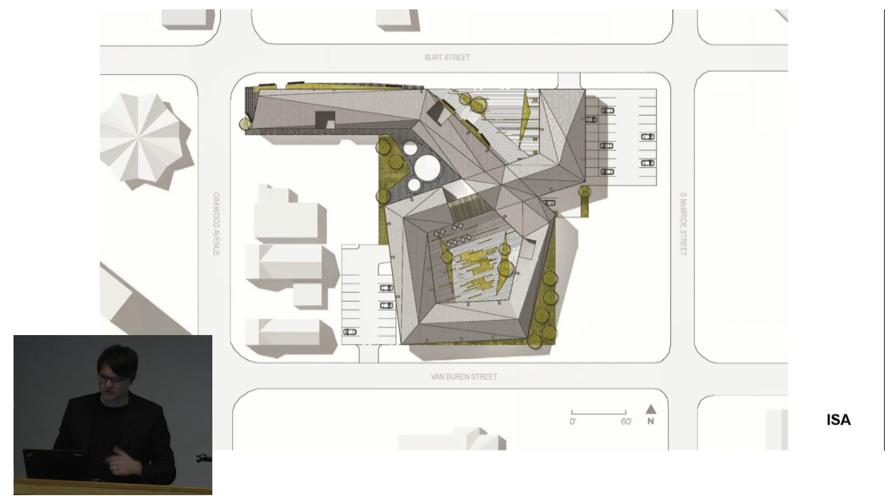So we have a series of projects—it's a whole other talk, but I wanted to mention it because I know this is on the minds of some of the faculty and students here. We're very intrigued by this idea of evidence, and this question of how architects react to big data, which is only going to be an ongoing condition, and how you parse it. This is an example of us beginning to grapple with that.

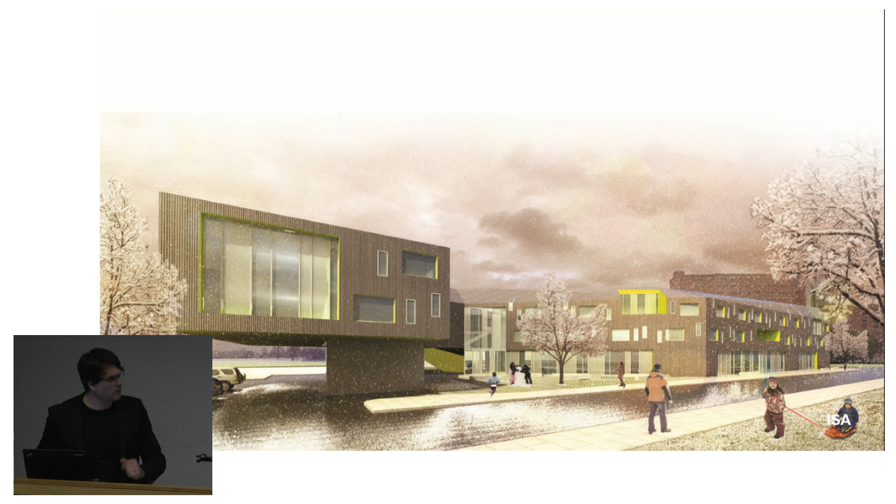Finally, I just want to circle back—I'm five minutes away from questions. So the Granary project, which kind of imploded at one point, was kind of interesting.

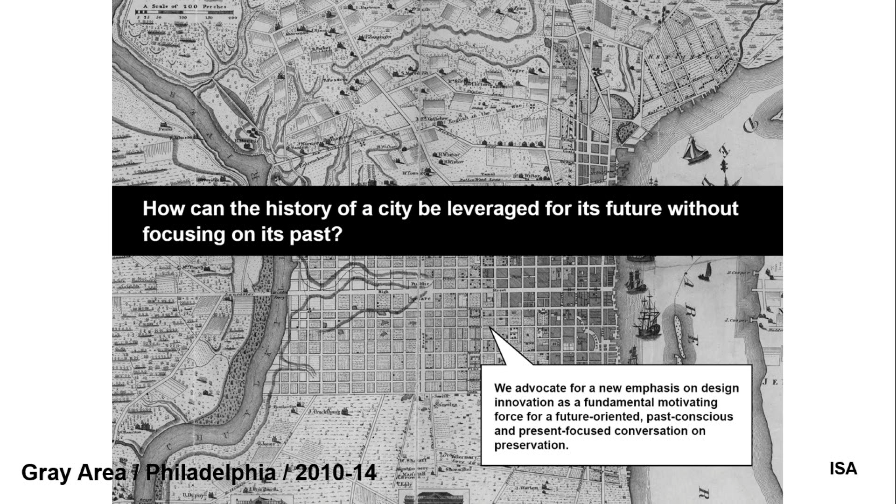No, I mean, it didn't literally implode—well, the wood frame grain version of it actually imploded, but the politics of the project fell apart for us. What was interesting is on the back end of that, the Pew Center for Arts and Heritage, who's been a friend to us in a number of ways, said Philadelphia just isn't thinking big about history. They wanted to ramp up the discussion around historic preservation and gave us room to invent. They funded three different cycles of this project we called Gray Area, which was really about how historic preservation tends to be either you keep it or you don't—it goes back to some of the projects I was showing. How can we begin to tinker and tool around with that?

So I think some of the things we argued was this idea that traditional preservation tends to be very focused to the left of this, which is about buildings and details, like the first slip form concrete building—we can't touch it, that's important as a kind of memory. But really we're beginning to think about neighborhoods and cities and how they're affected by both positive and negative qualities of old construction.

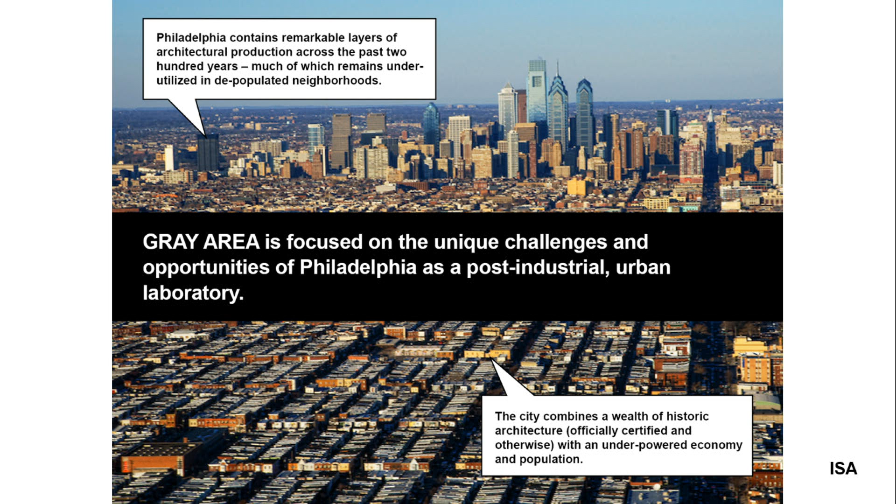Our first cycle was really the challenge of how do you begin to calibrate preservation to the local conditions of your city, which I'm curious about what the conversations are like here—they must be fascinating. The first iteration was just figuring out if people cared and asking big questions. The second was a dinner we had for 100 people, which I'll show a couple pictures of. And the third was really going to the neighborhood level.

The first iteration was a book we put together, inviting a bunch of our friends we thought were doing interesting things in Philadelphia. The first thing was to say there are actually interesting responses to history happening—not to say that there aren't.

We talked about shells, platforms, and voids. Shells are going in and changing the inside. Platforms are the Granary and the Eastern Building, which I talked about—literally plinths or objects upon which you can build. And then voids—much like Detroit, Philadelphia has a lot of vacancy and underutilized area, and we wanted to include that as part of the history-making, organizing around it.

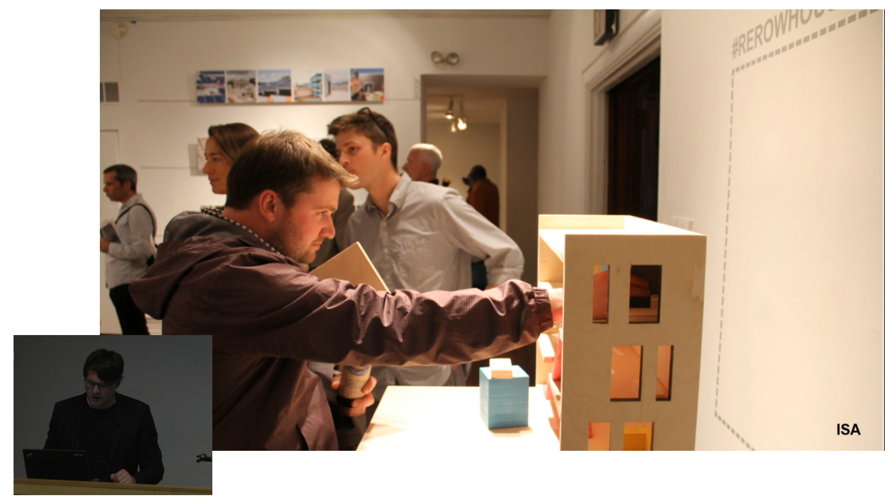We're at the moment in the running for a very interesting grant that would allow us to do a much more expansive row house study in Philadelphia. There are a number of other things we're doing that we see as a kind of feedback loop for the practice. We make buildings and take building buildings very seriously, but we also take spin-off opportunities, like the gray area project and the row house research, and some other things, to help reinform how we're doing that.

That's it. Thank you.

A few questions, since we were going to be here till 8. Brian, you ended up very quickly, appreciate that. But questions about the work, the approach, or Brian's teaching are fair game too — he didn't talk about that, but I'm sure it's probably fair game for questions as well.

Do you guys do models when coming up with some of the windows and the incisions and the way you pull it out? Do you practice with models? Did you need to build models?

Yeah, physical models — we do, although I have to say it's waned a bit. We're finding ourselves using 3-dimensional software in fast, iterative ways that we think are similar to building models, but we go back and forth. It depends on the project. 3-dimensional visualization is super important to us.